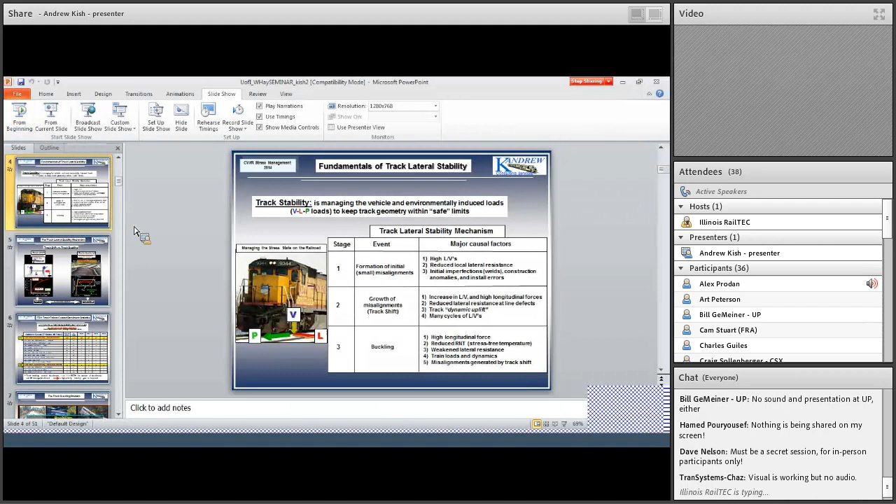Try to get those fixed.

Okay, so again, these are parts of the track lateral mechanism. The three events are: number one, the initial defect generation; number two, the growth of these defects under load; and third, when the defects become unstable in the presence of high compressive forces, we get sudden track buckling. Many parameters are involved, and we'll touch upon these in just a bit.

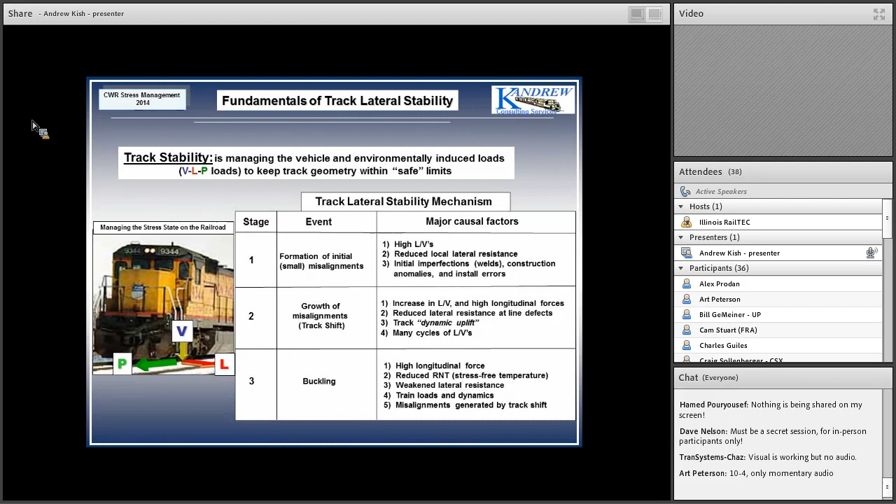But it's important to distinguish between number two and number three, namely between track shift and track buckling. Basically, track shift asks the question of what is the maximum allowable net lateral load into the track structure to keep the geometry limits within safe values.

As we increase the lateral load into the track structure, you get deflections on the multiple load passes, as shown in this figure at the bottom. On the left axis is the cumulative deflection on the lateral load; the bottom axis is the number of axle passes. If you apply higher lateral load, you get larger deflections. With low lateral loads, you may get none. The key thing is to find the one that's safe from the operational perspective.

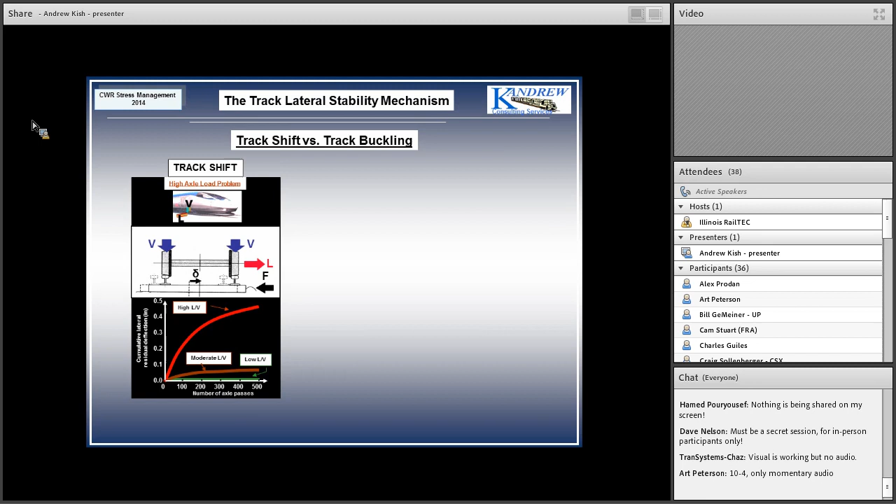So basically, this is a high axle load problem, a load deflection problem, as opposed to the track buckling problem, which asks what is the maximum allowable thermal force into the rail tie structure to prevent the sudden instability you see over here. The issue is to find those parameters that govern this response, and we'll talk about the mechanism a bit later on.

Now, the good thing is that we have models available for these. There's a model called TREDA for track shift, short for track residual deflection analysis. And for buckling, we have a program called CWR Safe. These were developed and tested by the USDOT Volpe Center in the mid-90s, and they're the ones we currently use for analysis purposes.

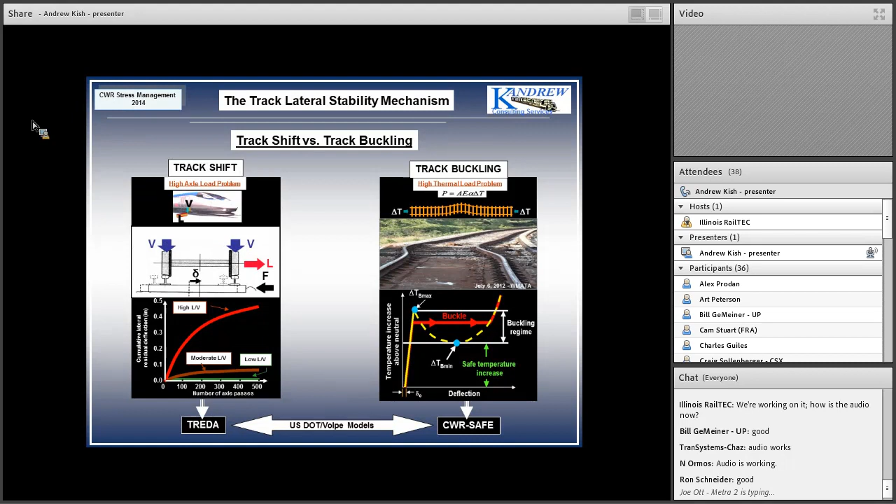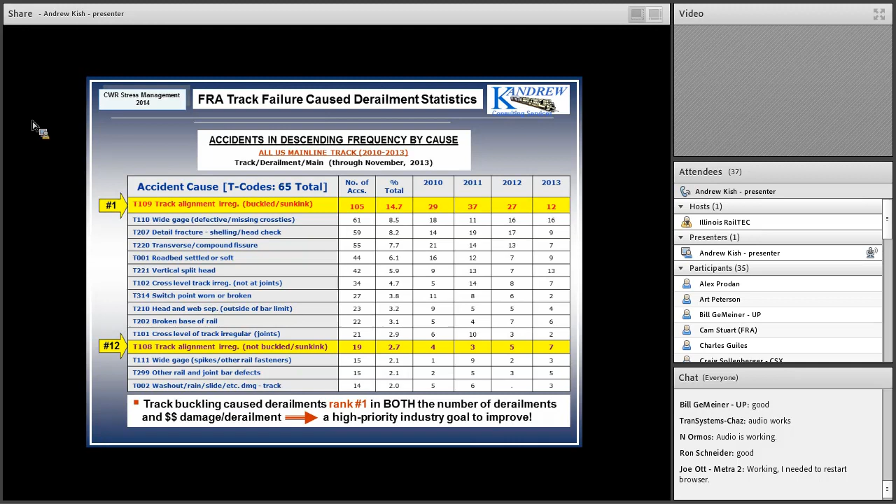Why do we care about this problem? Why is there a big worry on the industry side and FRA side? Well, according to the FRA's accident statistics that track these accidents and derailments, track buckling ranks number one in all track derailments, with 65 cause codes, and track shift ranks number 12. Not only that, but these buckled tracks are very expensive in terms of derailments, and that also ranks number one as far as dollar damage per derailment. These are very serious problems to the industry, and they're concerned about reducing derailments from these modes.

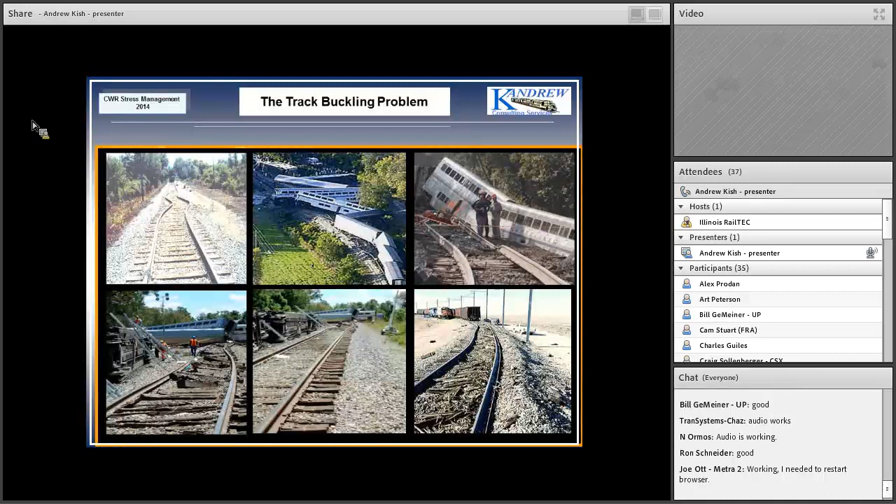If you haven't seen buckled track before, it's nasty - the consequences are serious. The problem is that these incipient buckles are very difficult to detect. They happen suddenly under the moving train, so it's a dynamic event, and of course they can cause derailments. In the US we have many derailments a year. One example, two years ago, we had 27 mainline derailments at a cost of almost $1 million per derailment. This does not include injuries, fatalities, emergency response, evacuations, and so on, so that figure is actually much higher. It's a serious problem.

Railroads also experience many incidents of track buckles or sun kinks which do not result in derailments. That's of course a high cost item from the repair point of view. And this last one - we always think about buckling as a hot weather compressive force problem, but it turns out that winter conditions, when the rails are in tension, causing occasional pull-aparts and rail breaks, also contribute to track buckling, as we'll see in just a bit.

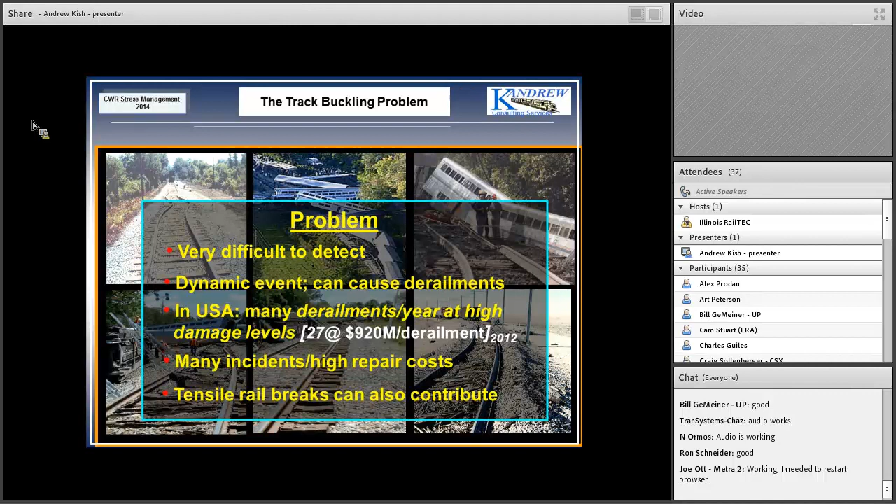So how do we prevent it? The three golden rules for preventing track buckles are: one, keep the thermal forces within safe levels, which really means managing a parameter called neutral temperature, which we'll talk more about later. Two, ensure good track conditions, particularly when it comes to ballast lateral resistance and track alignment defect condition. And lastly, control train dynamics and loads to the extent possible - here we have to think about speed restrictions at certain times. The question is when and where.

Seems easy, right? Not so, because the problem is to determine what these safe levels are and how to manage the neutral temperature in line with those safe levels. Also, what are good track conditions? Well, pretty much they're good or in between, but many times when we maintain a railroad, especially ballast, it gets very weak, and that gives us a lot of concern in terms of offering the resistance required to prevent buckled track. With the last item, the issue is when to impose speed restrictions, at what temperatures, and where - all over the railroad, or just local trouble spots.

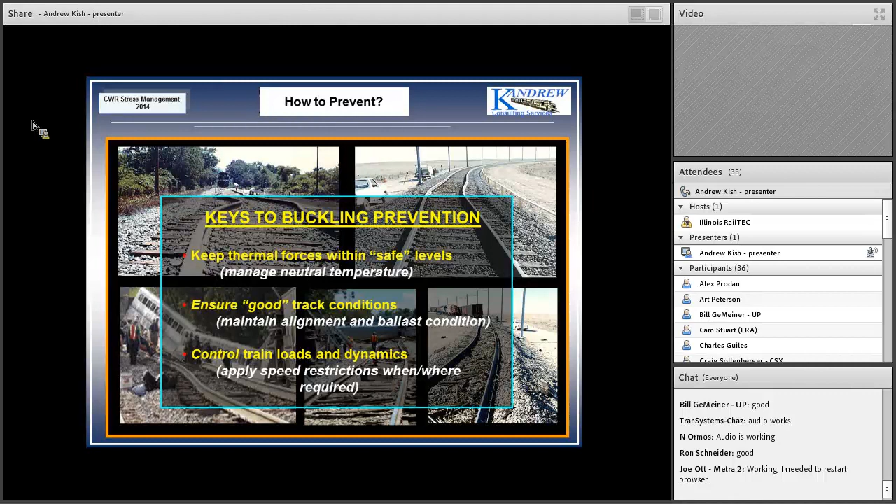Let's get back to the basics. What is track buckling defined as? It's nothing more than the formation of large lateral displacements due to the combination of three events: number one, high compressive forces; weakened track conditions; and vehicle loads.

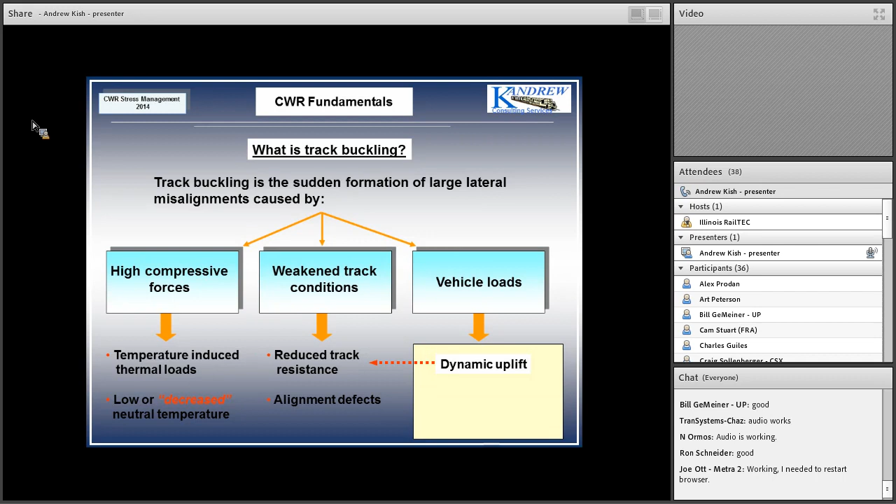Under the first one, the compressive forces are basically temperature-induced loads due to the difference between the rail temperature and the neutral temperature, which we'll talk more about later. Weakened track conditions are basically due to reduced track lateral resistance from the ballast perspective, and of course alignment defects. The vehicle loads themselves don't produce buckles directly - what they do is impact these other two parameters: dynamic uplift causes impacts on track's lateral resistance, high axle loads give us more alignment defects, and braking and traction loads add to the compressive forces and also impact the rail neutral temperature.

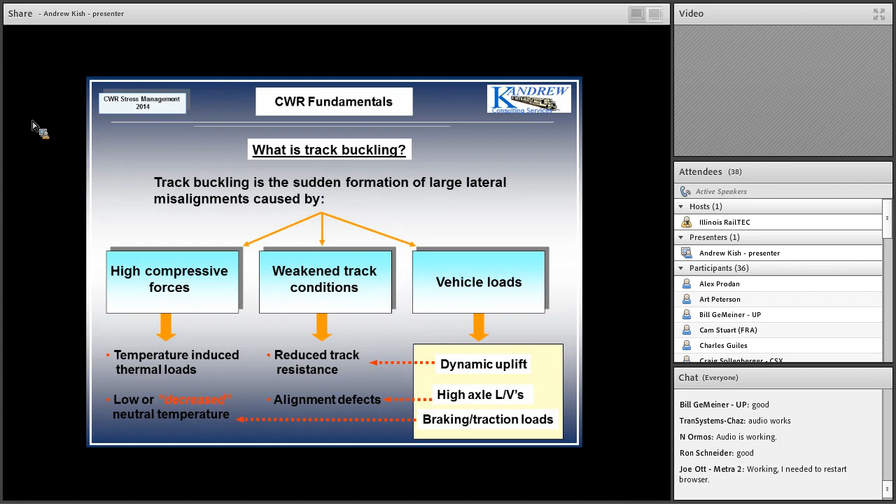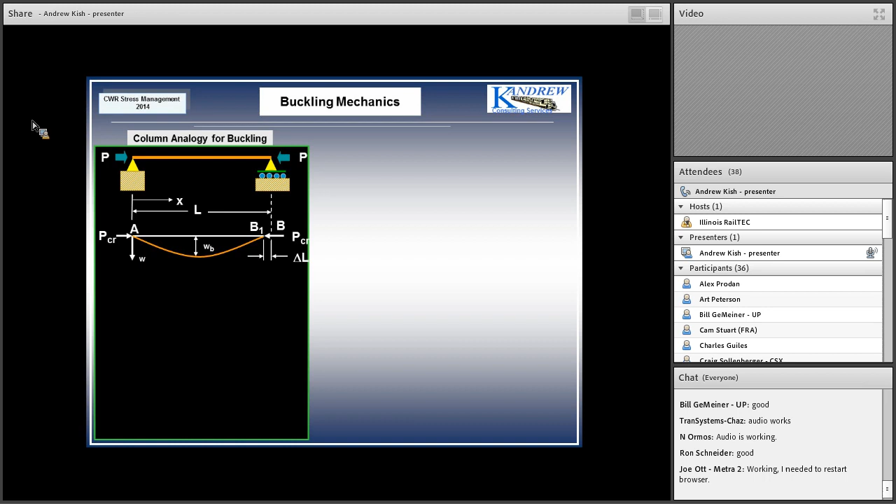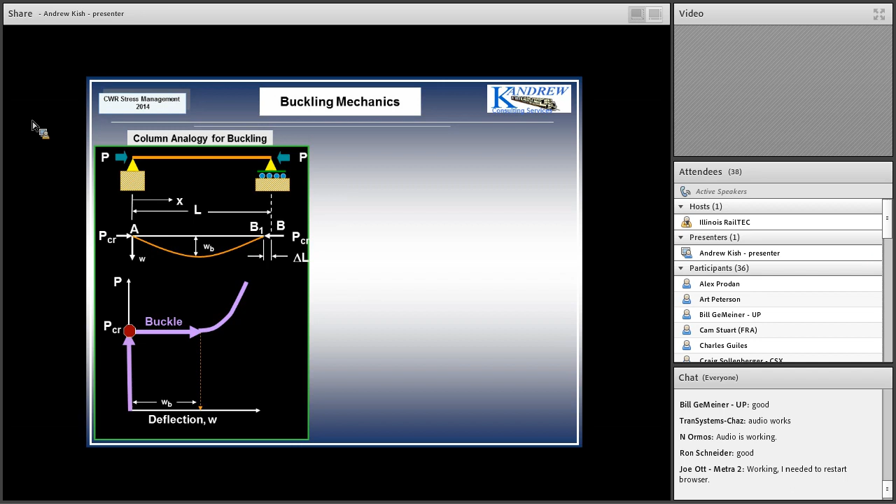So what's the mechanism? It's good to begin a little with Mechanics 101. We all know there's a simple beam under uniaxial compression, load P. That beam stays straight until we reach a certain value of P critical, at which time suddenly it buckles out into the configuration you see there. If you plot the load deflection, P versus W deflection, you get a simple curve where up to some load P critical there's low deflection, but beyond that, once it buckles out, you get deflection obviously. If you increase the load beyond that, you get more and more deflection. Very simple - we all know this problem from basic mechanics.

It's good to think about this in the context of the railroad track, because if you think of the track itself as the beam, it simplifies substantially. The thermal load now becomes the load P, but it's a bit more complex because we have added parameters such as ballast resistance, misalignments, tangent versus curved tracks, and vehicle loads acting into the track system. So it's much more complex, obviously. But the good news is that the temperature load deflection behavior is very similar for our track as well, just like we've seen there.

The bad news is that because of the problem complexity, the many parameters involved, and being a dynamic problem, our current theoretical mechanics does not allow us to determine the exact value where this buckle occurs.

And the good news is that this curve brackets the actual buckling temperature. In other words, the upper value here being T sub B max, the lower value being T sub B min, that kind of brackets or gives the upper and lower bound on where the track should buckle out. So yes, even though we don't know the exact buckling temperature, we'll know at least the upper and lower bound, or the buckling regime when it occurs.

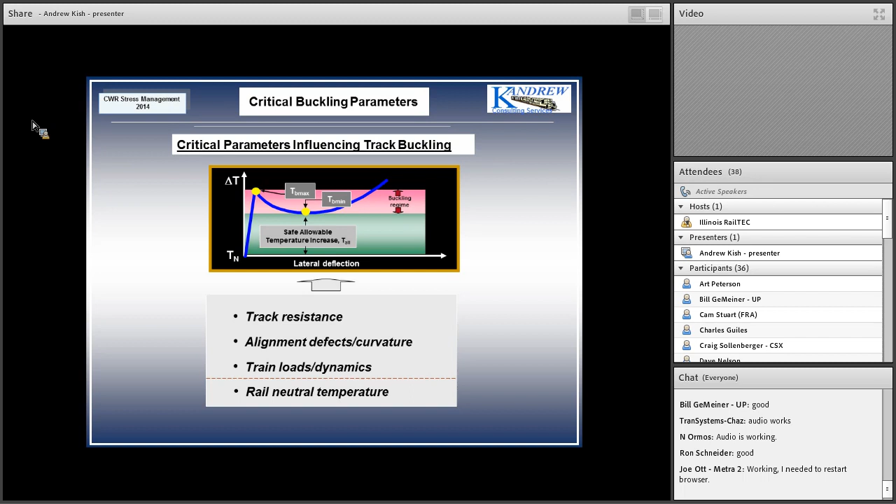Starting with track resistance, also complex. It's got 3 components: lateral, which you typically think of as a lateral spring, longitudinal, and rotational. The lateral is due to ballast. The longitudinal is due to fasteners and the ballast. And the rotational is due to the fastener's rotational capability within the rail tie structure.

Out of these 3, the most important one is in fact the first one, the lateral resistance. And that's basically the reaction offered by the ballast to the rail tie structure against lateral movement.

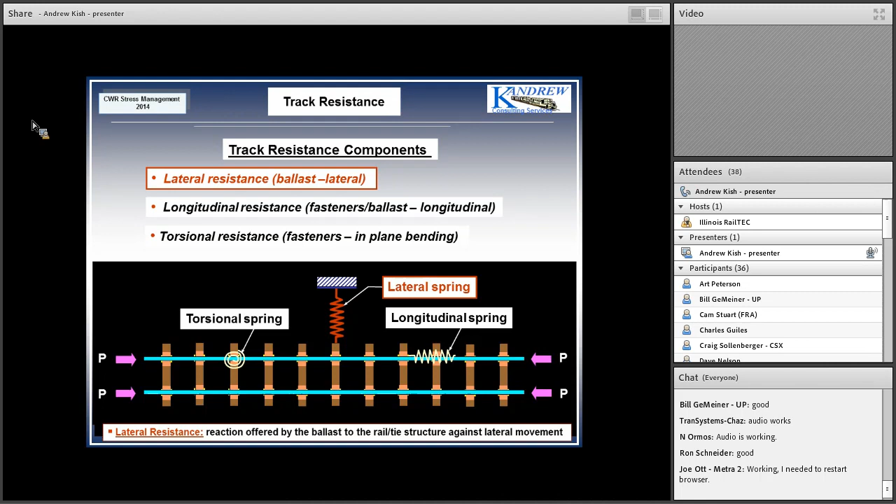How do we measure this thing? Well, in the US we use a technique called the single tie push test. Basically, you have a device that grabs the rail at the base, grabs the tie at the shoulder insert, which you can't see. You apply a lateral load through a hydraulic fixture to the rail into the reaction, and thus push the tie out of the ballast. And you measure its load deflection.

Other measurement techniques in the past involved a discrete cut panel pull test, an entire continuous panel pull test, TLPT. Recently, Plasser developed a technique called the continuous dynamic measurement as part of the dynamic track stabilizer, and we'll talk more about that in just a bit. And we even have an empirical model as part of our CWR-SAFE package.

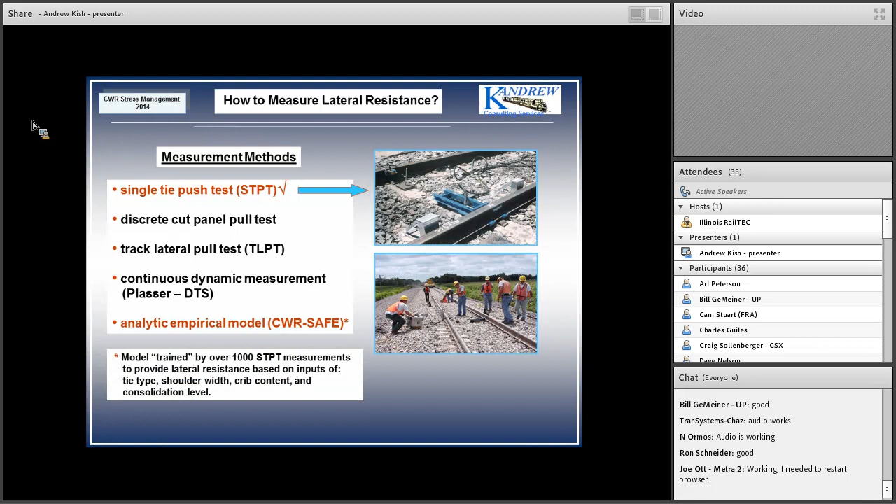Question is, what happens when we push a tie in the ballast? What do we get? Well, we get a fairly complex set of signatures. So you see on your top left there, depending on whether the track ballast is weak, average, or strong. For weak, we get the blue curve. For average, we get the yellow curve. And for strong, we get the orange curve.

Each of these have an elastic initial stiffness, an elastic limit, a peak value, a drooping resistance value, and eventually a limit resistance value. So analytically, it becomes kind of complex.

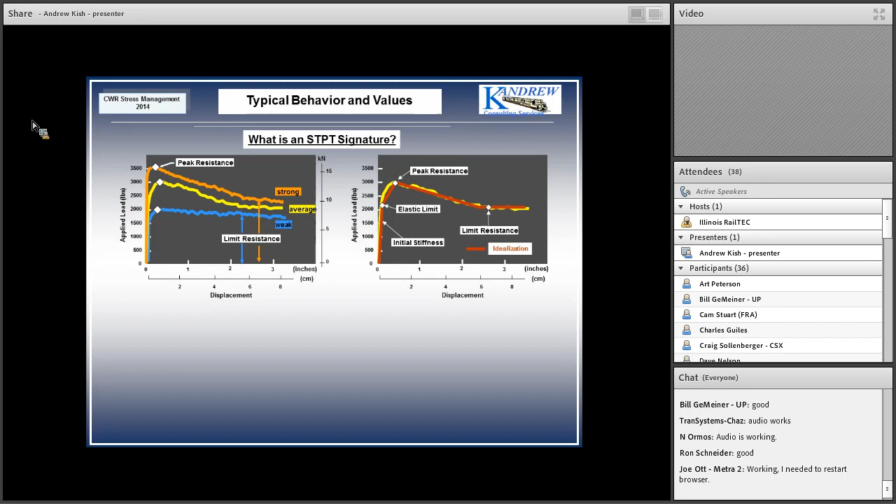We generally characterize ballast resistance in terms of these peak values you see over here. Just to give you a feel for what those are: weak tracks are basically in the blue regime, under 2,000 pounds per tie. Average is the yellow, and orange is strong.

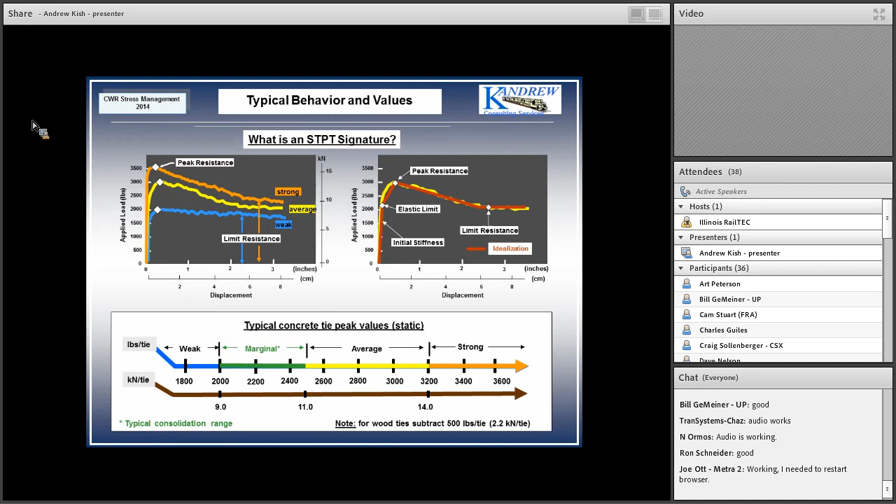Now, as you can imagine, there are many parameters involved in terms of how high these peak values could be. They range from the kind of ties you have, concrete versus wood, the weight, shape, size, the ballast type, the spacing, so on and so forth. Issues with consolidation and maintenance, and even dynamic loads. We won't be able to go into all of these this afternoon. I'm just going to briefly touch upon just a few.

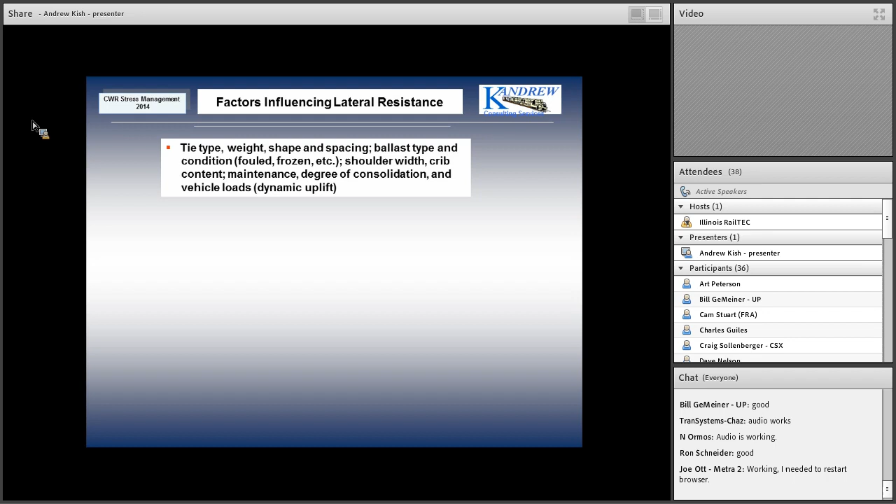First is the impact of vehicle loads, namely this dynamic uplift. What happens to this track structure when you apply a load to it? Well, obviously, under the load, there's an increase in lateral resistance. In between the trucks, where there's a dynamic uplift, negative bending, we have reduced lateral resistance.

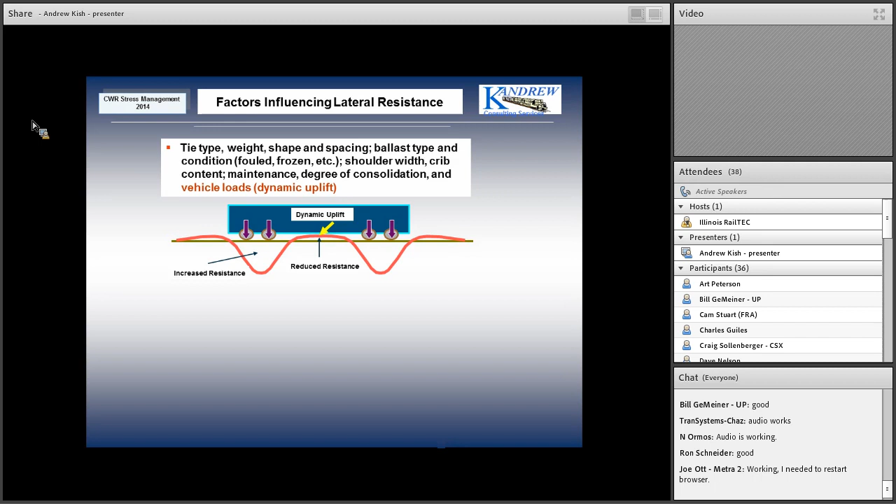How much reduction? Well, again, we have a lot of tests that tell us that the components of lateral resistance on a tie have three parts: one from the shoulders, one from the sides, and one from the bottom. In terms of percentage contribution, the rough rule of thumb after many tests is that the shoulders give us about 25%, the sides give us about 35%, and the bottom around 40%.

So what happens when you have dynamic uplift? Well, what happens is that you free up the tie bottom somewhat, and that means we might lose as much as 40% of the resistance under dynamic conditions. That is in fact why, when tracks buckle out, they buckle out in between the two trucks, as you see over here, as shown by tests. Hence the importance of this dynamic uplift.

Now, you might think, well, the shoulders contribute only 25%, not a big number, right? Why do we care about it? Well, the answer is that once we have dynamic uplift and we lose up to 40% of the resistance, what keeps the track in place? The 25% on the ends and the 35% on the sides.

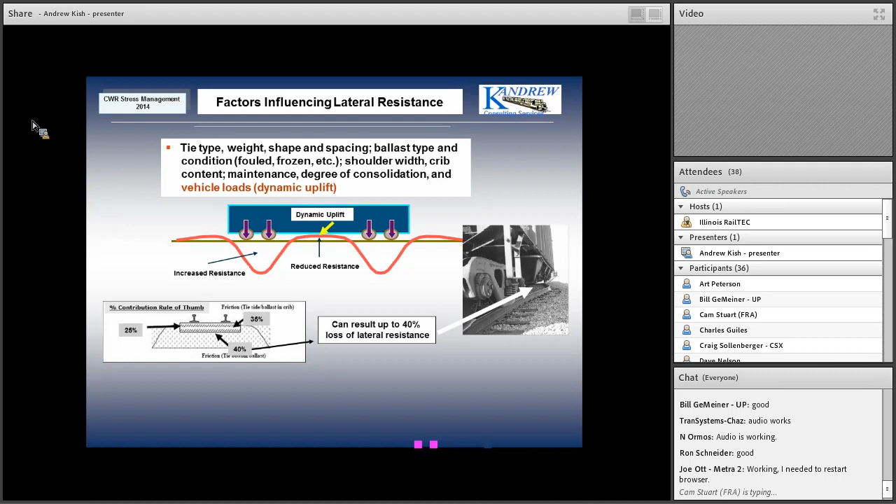What else? Well, in curves, we have an issue again with the fact that curves move back and forth. You've seen pictures of this, I'm sure, in the past, where these curves under thermal load tend to breathe in and out. This lateral motion has a whole bunch of issues with it. Number one, when curves move in and out, the stress changes in the curves, therefore there's an issue with neutral temperature.

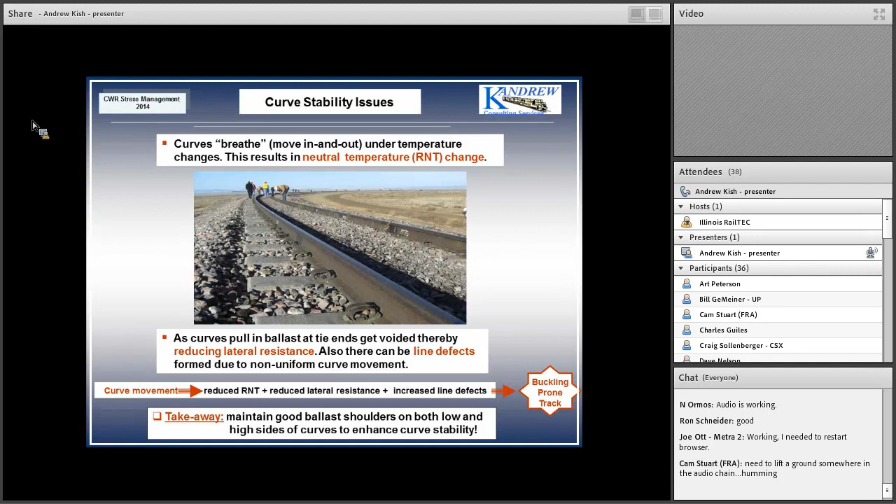With the ballast reduced in the shoulders, we're losing a lot of resistance. And of course, when curves move in and move out, it's not a uniform movement. In other words, the curve will not be perfectly nice and uniform. You think it's going to have some line defects. So when we couple all these elements together, reduced rail neutral temperature, reduced lateral resistance, increased line defects, these are the three main ingredients for buckled track. So the bottom line is we have to be very careful about maintaining ballast shoulder width, even though it's only 25%, especially in curves, it's a big impact on lateral stability.

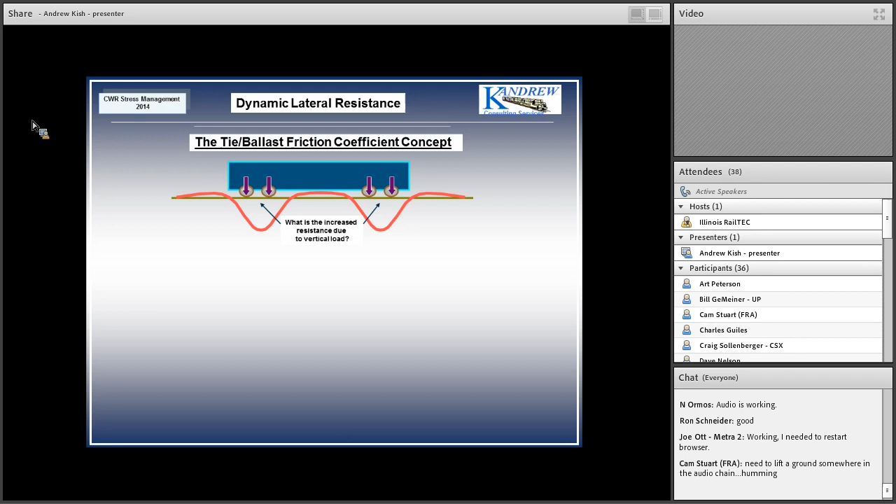What about under the load in terms of increased resistance? Well, we know that vertical loads obviously add a lot to lateral resistance, and this brings into focus a parameter called the tie ballast friction coefficient. That is a coefficient that relates the vertical load to lateral resistance. Namely, if I apply vertical load to the tie and attempt to push it out laterally, the resistance is going to be the sum of the static condition and the dynamic condition, being the loaded condition. That means we have to add a parameter called this friction parameter times the vertical load to the tie. How do you get this mu factor?

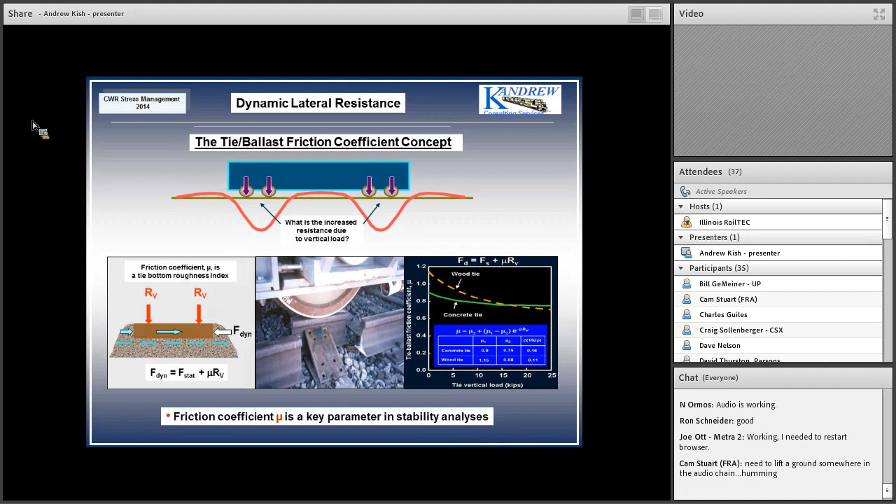You've got to do tests. You've got to apply different levels of vertical load to the tie and push it out in the ballast laterally and measure its loaded resistance. So from the difference of the loaded and unloaded, we can figure out what this friction parameter is. Bad news is that it's a complex parameter. It's nonlinear with load. It changes with tie type, whether it's wood or concrete. This is one area that's very important for us because this parameter has a big impact on both the track buckling part of the problem, as well as later on the track shift part of the problem.

All right, that's it for lateral resistance. I want to just briefly touch upon one more parameter, which is the maintenance and consolidation influence on lateral strength.

We know that when we work ballast, we do surfacing, lining, tamping, undercutting, ballast is disturbed so that the track lateral resistance decreases substantially. How much? By as much as 40 to 60% in some cases. It requires us to get that

back to regenerate the condition to better values. Now we have two ways of doing that. One is what is called dynamic track stabilization, or DTS, or by traffic tonnage.

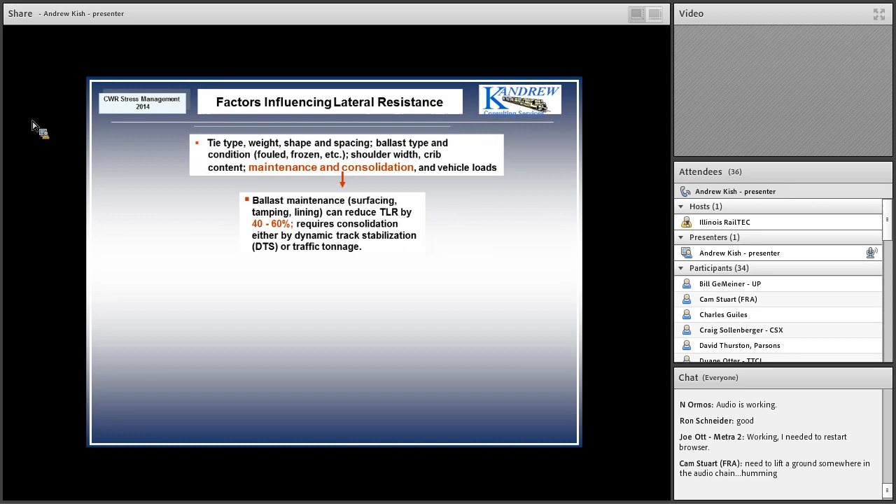Some of you are not familiar with the DTS, or dynamic track stabilizer. Basically a machine developed by Plasser back in the early 80s. It's a machine that applies a vertical load to the track structure, coupled with a horizontal vibration of a certain frequency, 30 hertz, and you move this along the track at slow speeds, up to 1 mile per hour. What this does is, the combined effect is you reconsolidate the ballast particles and also increase this friction coefficient at the tie bottom, resulting in an immediate 30 to 60% recovery of lateral resistance. It's a really good thing to do.

What about tonnage? Well, that's a bit more difficult for us because we know that many applications of vertical load will eventually give us some stabilization. But unfortunately, to date, the mechanics and the rate are not well understood.

How much tonnage do we need to get the track back to a safe value? Well, based upon some early European tests, the assumption was that you need at least 100,000 tons, or 0.1 million gross tons of traffic, to at least achieve the same as the dynamic track stabilizer.

That's a lot of tonnage. It takes some railroads 2, 3, 4 days to get that at slow speeds. It's a very, very bad thing to have in terms of putting on this traffic and consolidating at a slow rate. The point is that today's research has not really quantified whether the quantity is really 0.1 or much more.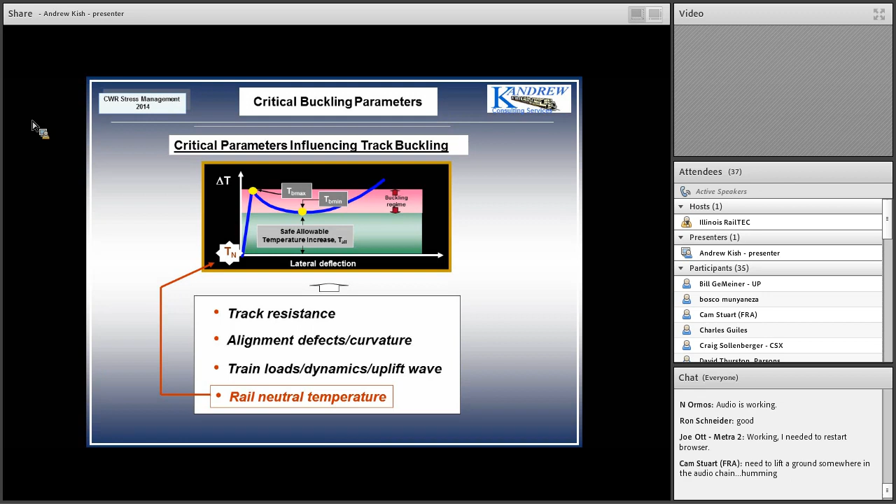What is it all about? Well, we know that stresses are made up by many components to give us the load P: thermal, mechanical, and residual. If we integrate the stress over the area, making some assumptions, we get a simple equation that relates force to temperature: P equals E alpha times the temperature difference in the rail, TR minus Tn. TR is the rail temperature, and Tn is its magic neutral temperature.

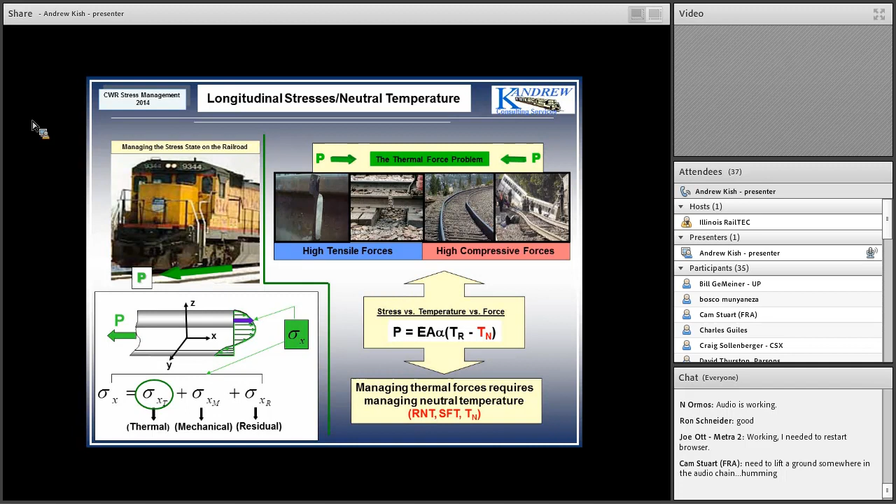And of course, when these forces are high in compression, you get potential for track buckling. When they get high in tension, you get potential for rail breaks and pull-aparts. So managing thermal forces really comes down to managing this parameter called neutral temperature, which you see in literature sometimes as T sub n, sometimes as RNT, sometimes as SFT. SFT is short for stress-free temperature.

And that's the definition. Neutral temperature is defined through this equation. It says that neutral temperature, Tn, is that temperature at which there's no force in the rail. You set P equals 0 in this equation, and you get that the rail temperature equals neutral temperature, which is the definition.

E, A and alpha are just engineering constants. E is the rail's modulus of elasticity, A is the cross-section area, and alpha is the coefficient of thermal expansion. If you multiply those three together for a 136 pound rail, you get a number like 2600. That says that for a 1 degree change in temperature, I get a change in force by 2600 pounds.

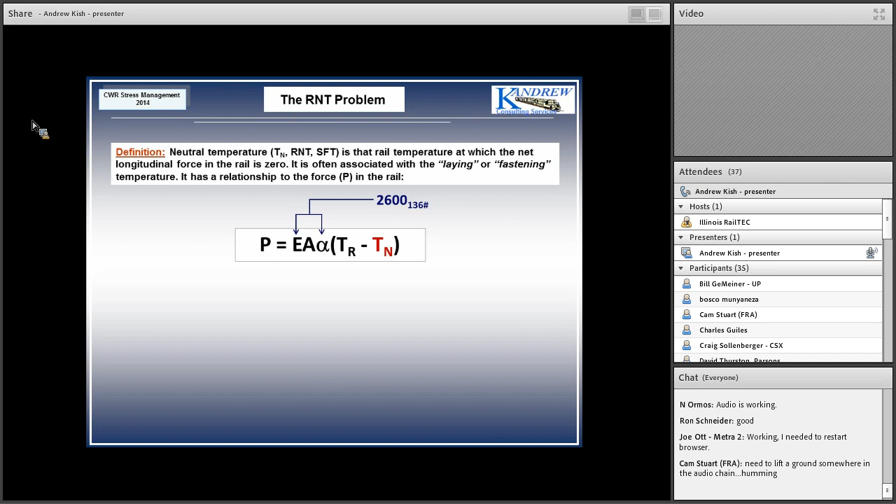Now you can easily put some numbers in this equation. Let's take a nice high neutral temperature of 90 degrees, that's a good value, and a hot summer rail temperature of 130. Now these are rail temperatures, not ambient, okay? This equation gives us roughly about 100,000 pounds per rail. Big number, but not big enough to cause any sort of buckling worries.

However, if now this neutral temperature is no longer 90, but say it drops down to 50, then the equations give us, keeping the same rail temperatures as before, the force in the rail doubles, and this force level of over 200,000 pounds per rail is big enough to buckle the track out.

So you might ask the question, well, that's nice, but does neutral temperature migrate so much up and down? And if so, why? Well, the answer is, unfortunately for us, yes it does. It changes a lot because, first of all, the rail is not constrained in the rail tie structure completely. It can contract or expand longitudinally, move laterally in curves, and can even move vertically in track settlement. So rail kinematics impacts neutral temperature.

Also, when the rail breaks, or is cut for defect removals, what happens to the force? Force goes to 0 at the break. The neutral temperature becomes the rail break temperature, so rail breaks also cause a large reduction in neutral temperature.

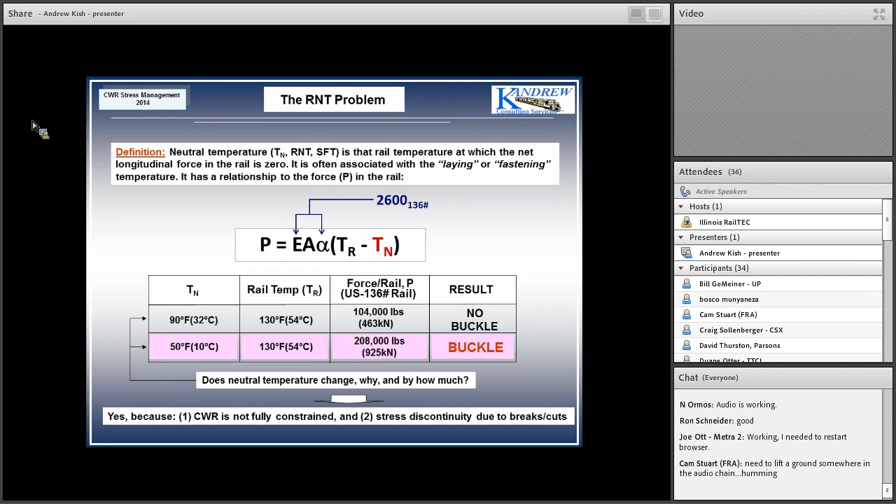Just to give you a feel for what's really happening out in track, this is a kind of nasty looking curve summarizing 5 years of testing on a major US railroad, neutral temperature. The vertical axis is the neutral temperature, the bottom is time, compressing 5 years of data in here. The green data is the high rail, the red data is the low rail. It's a 2-degree curve, concrete track, where the measurements are made by a device called the rail stress module.

It's done by a company called Salient Systems. It's a rail attach unit, based upon a strain gauge concept. It measures neutral temperature, rail temperature, and rail stress in a continuous fashion. And that's what you see over here plotted with time.

You might note the fact that typical installation regimes in the US are roughly between 100 and 110 degrees Fahrenheit. And you can see how much out of this range the RNT is. Kind of out of spec.

Point your attention to these little valleys over here. Those are results of rail breaks. So the rail breaks, cut for defect removal, the neutral temperature changes substantially.

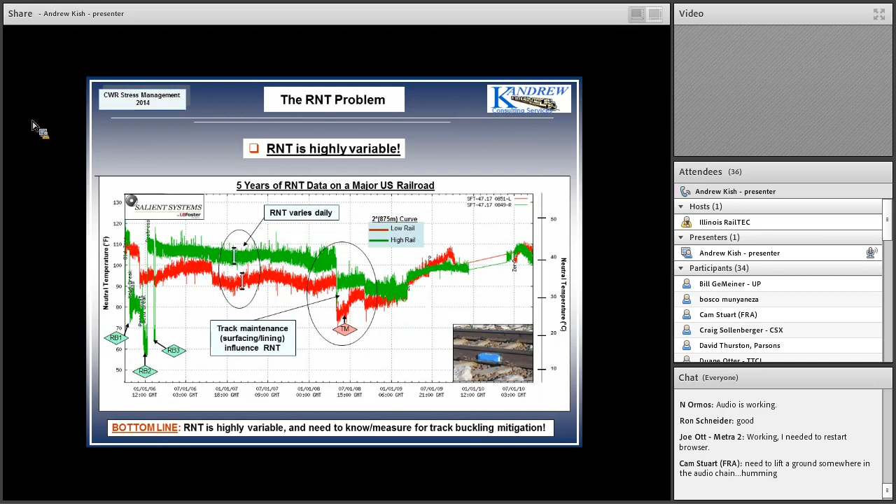So basically, the idea is that RNT is in fact highly variable, and its knowledge is very important for track buckling prevention and mitigation.

I want to go back to this rail break scenario quickly, just to give you a feel for what's really happening there. Unfortunately for us in the U.S. here, we have many rail breaks, about 80,000 per year.

According to the FRA's accident statistics, we have about 100,000 internal rail defects requiring removal from service. Okay? And as you've seen before, when the rail breaks, its neutral temperature goes down. And the problem is now when to make this repair, when to come back and adjust. If I don't make this adjustment before the advent of warmer temperatures, the track will become buckling prone. When I do come back and readjust, how to adjust a condition where I don't know what the neutral temperature is. The railroads don't have these measurement schemes in place, so they have to guess at the depressed neutral temperature condition to adjust.

So basically the problem is that in any given year we have over 180,000 locations on the railroad that might be potentially buckling prone.

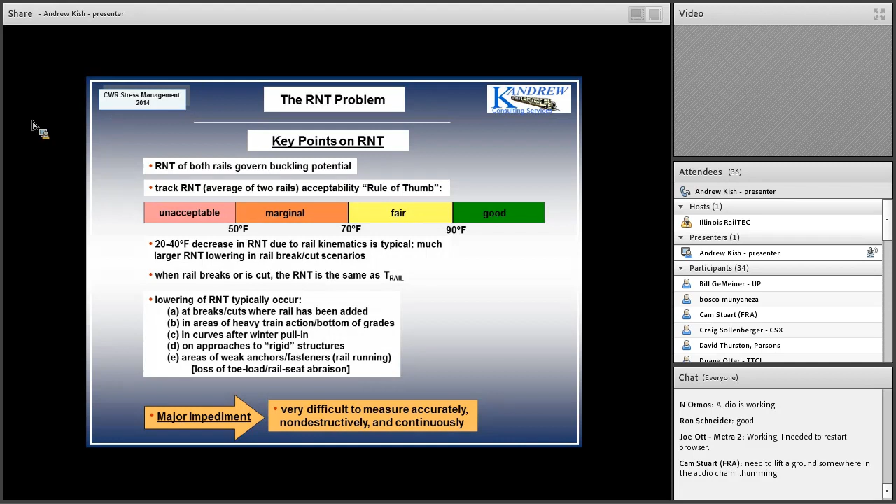And that's because over the years we tried many, many techniques, ranging from strain gauges to rail uplift concepts to ultrasonics, acoustics, magnetics, and so on. All these are good techniques from a physics perspective, but when it comes to practical implementation, they all have issues with accuracy and with not giving us continuous data. Some are destructive, some are not, and they're not too cost effective. So this becomes one of the major needs in terms of R&D.

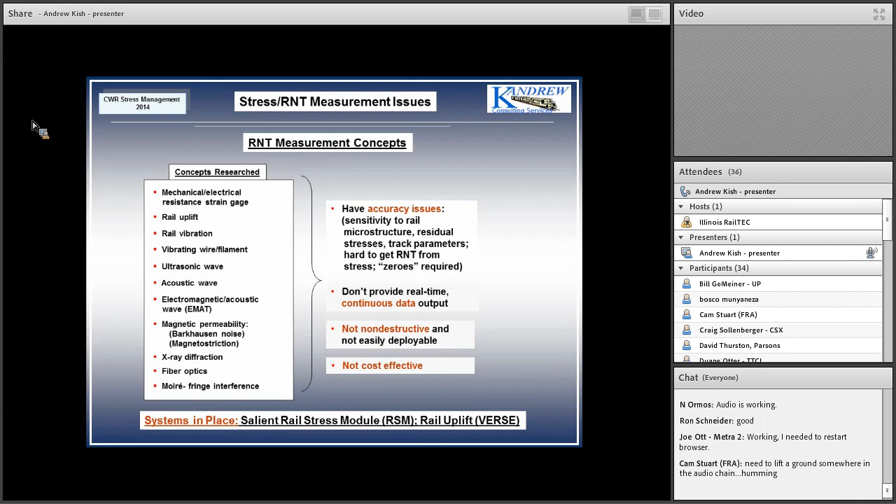I'll come back to this a bit later on. There are two systems in place today in the US that are being used mostly for test purposes.

One I mentioned before is the Salient RSM package. It's a rail-based package with electronics measuring rail stress, neutral temperature, and rail temperature. They already have a situation where they access stored data through a wayside reader, and that sends the data to a database management system accessible from the internet. They also can detect buckles by monitoring these conditions and issue a hazard warning, and they can detect rail breaks.

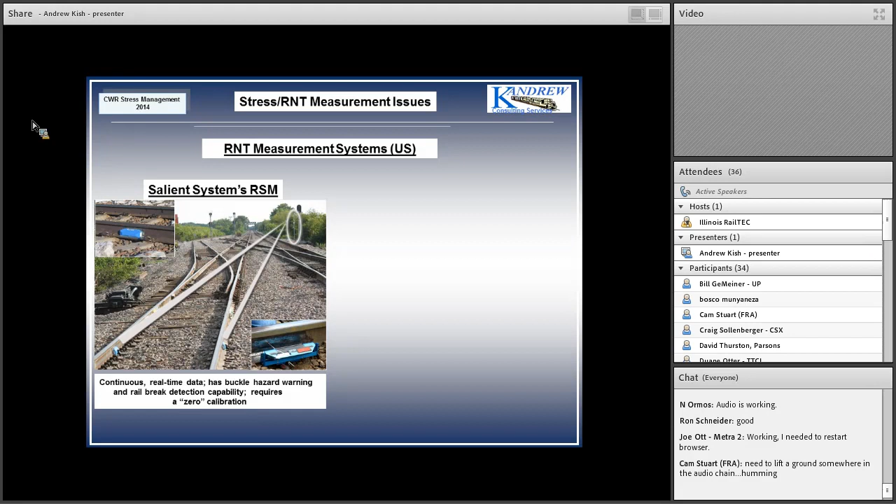The other one is the rail uplift, a concept based upon lifting the rail up with a known force, measuring its deflection, and applying that to a beam bending equation to back-compute what the force in the rail is. This is the frame-type structure that does it. The problem is that it only works when the rails are in tension, and that's an issue because we don't know when the rails are in tension. Sometimes you're going to make this measurement at nighttime.

It doesn't work in curved tracks. Curved rail uplift is very complex analytically. And of course, you have to unfasten a section of rail—in this case, 50 feet either side of the measurement point—so it becomes somewhat destructive as well.

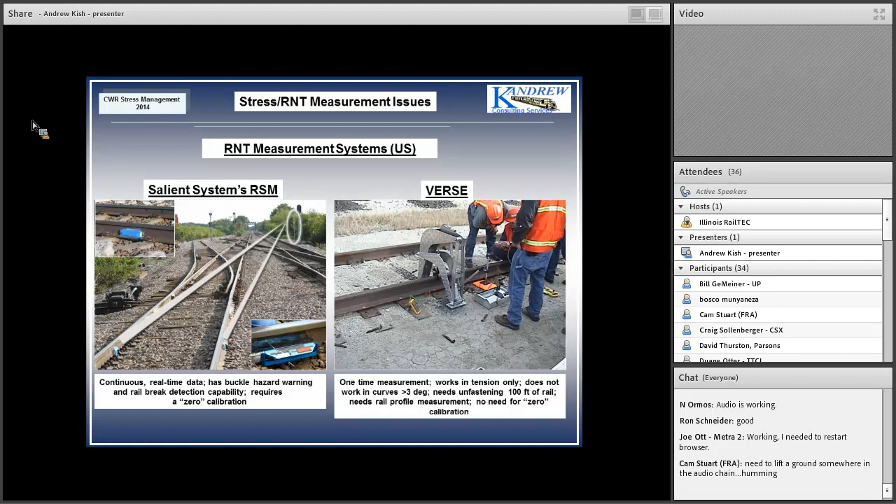The good thing about the system is that it does not need any initial calibration. You need to know the rail cross-section area, so if you get worn rail, you can make some profile measurements because that goes into the analysis. So these are the two current systems in place.

Getting back to our stability issues in terms of safety criteria, it's very simple: we have to make sure that the loads in the track are less than the buckling loads. Now for a track, the longitudinal loads are the thermal loads—the difference between the rail temperature, T, minus Tn—and these must be less than the buckling loads. Buckling loads are, in fact, given by a stability criteria, the minimum point on this curve.

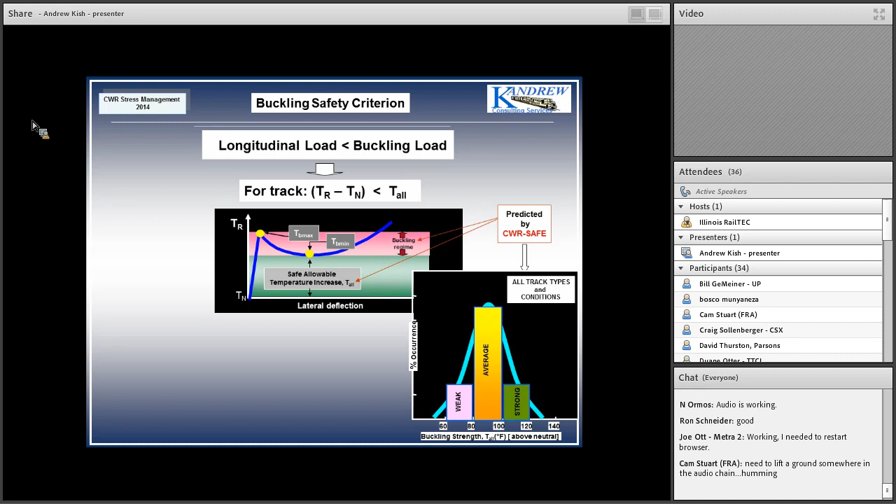Now, the good news is that on that part we're okay. Over the years we have done a whole bunch of model studies, about 1,000 computations on different track conditions and parameters, so we have a pretty good understanding of what these buckling loads are. The bad news is that we don't know the other part of the problem too well, namely what the neutral temperatures are, from which we compute these values. Again, these are highly variable due to kinematics, rail breaks, and defect cuts, and also very difficult to measure.

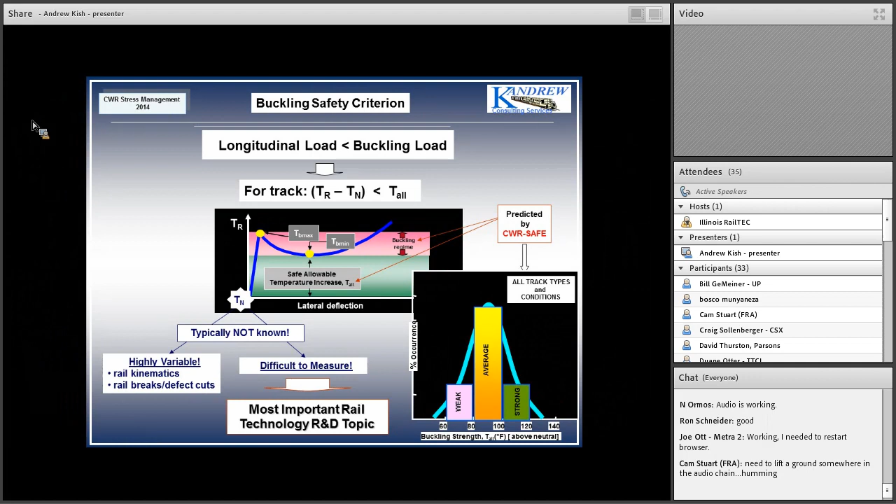This is, in fact, the most important problem in rail technology: to determine and evaluate RNT continuously and accurately.

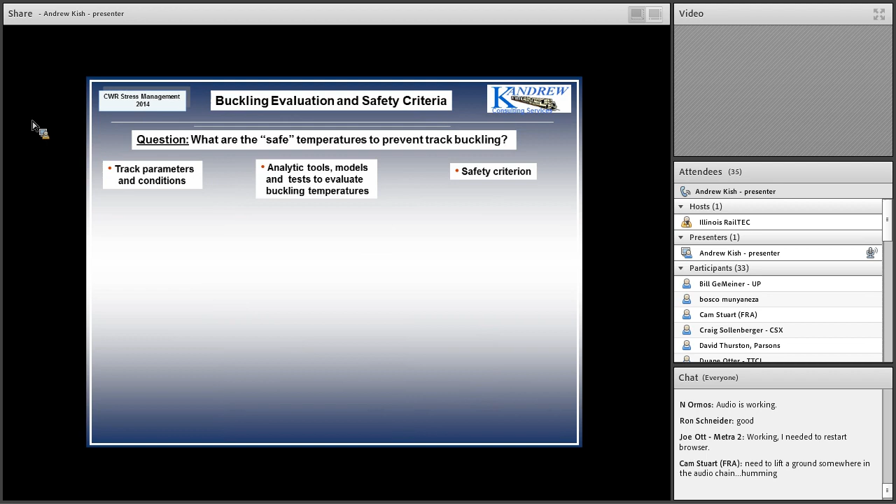So how do we get these safe temperatures to prevent buckling? We need three things: track parameters, a model, and a safety criterion. On the parameters, there are a whole bunch of them, ranging from rail type and size, curvature, line defects, lateral resistance—we touched upon some of these earlier. That goes into the model, and the model gives us this stability curve, the stability diagram.

Our safety criteria is basically this minimum point on the curve. As I said before, below this, buckling cannot occur or shouldn't occur; above which it does occur. And that's our buckling safety criteria.

The European standards are similar to ours, but they have two levels of safety. Level 1 is just like ours—they believe that the minimum point on this curve gives them the safety they desire. But they also have a less conservative value where they're actually allowed to go into the buckling regime by a small amount, to give them a bit more help in managing their track condition. How much do they go up? About a quarter of the amount of the buckling regime.

So, just a few things on the theory aspect—I know you might not be interested in this, but here it is. The model is basically a nonlinear classic beam theory, using variational principles.

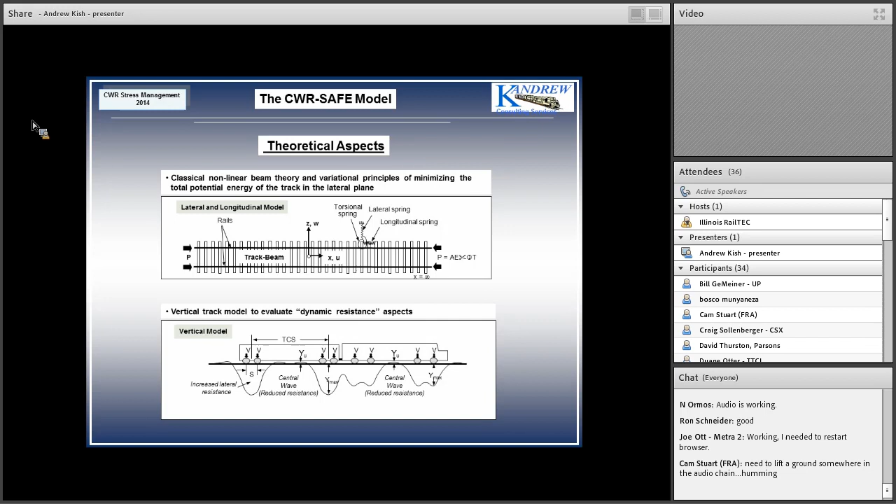We've got the resistance values, the torsional, lateral, longitudinal as nonlinear parameters in there. This is the lateral plane. You have to couple this to a vertical problem, namely determine the dynamic uplift, and hence the reduction or increase of lateral resistance, which brings in the issues of track parameters and loads. You've got to worry about both tangent and curve analysis.

And curve analysis is rather complex, as you can imagine here. And we've got to worry about boundary conditions, namely what sort of buckling motion shapes do you expect to get.

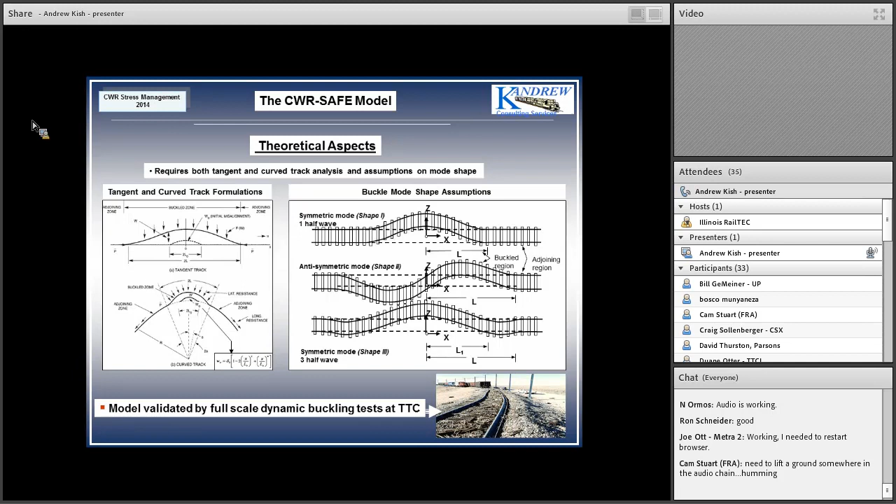And of course, all models have to be validated. We've done a whole bunch of full-scale dynamic buckling tests. Here you see the last one done in 1987, where we actually derailed a train to prove the concept. So we're pretty comfortable about the model being good enough for determining the safe temperature increase values.

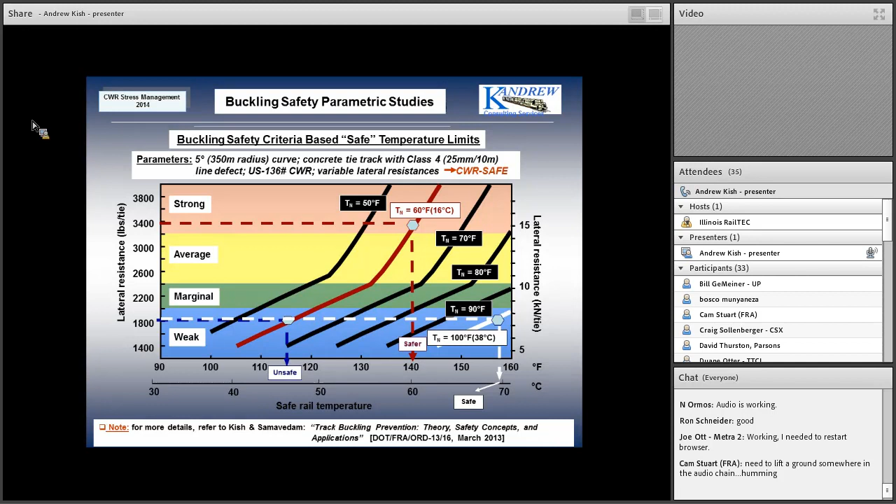If you're interested in a lot of details on this, in terms of a lot of parametrics, we only show you one case. Of course, we have to do this for tangents, 3 degrees, 7 degrees. You can look at different line defect conditions and so on and so forth. At least now we have a good methodology in place, understanding of what these numbers are. All those are available in this report you see down here. I think you have that available now, so feel free to look in there and get a better handle on how these parameters come together.

Quickly, on the track shift side, this is the problem that I mentioned earlier, where we have the issue of multiple load passes with high L-over-V ratios. It's a moving load problem. Here the parameters are, again, moving axle loads, both static and dynamic lateral resistance, thermal loads, curvature influences, alignment defects, and a lot of work done in the past where it was attempted to look at the problem from a static point of view. And that's why the moving loads are very important.

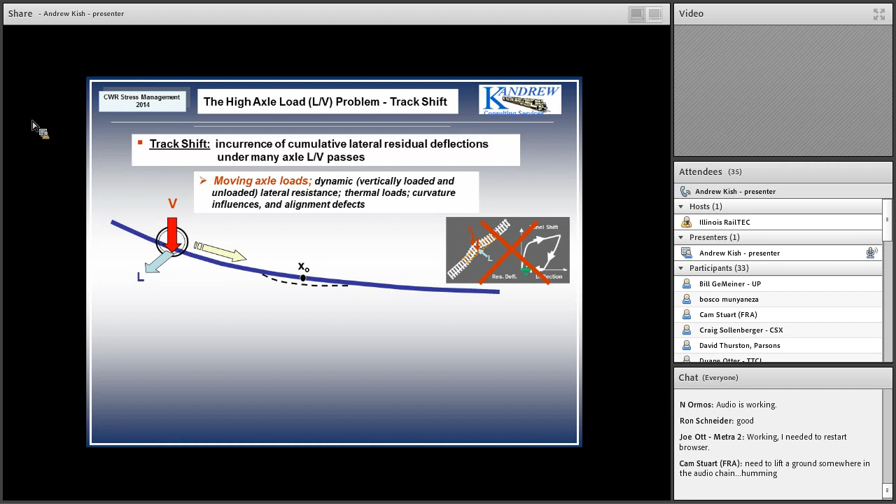The idea was to put on a set of vertical lateral loads at one point in the track at X0, push the panel out and measure the load deflection response that you see over here, and find out which combination of L-over-Vs give us a residual deflection. So it turns out this is not the way to go, because it highly underestimates the real problem, which is moving closer and closer and closer to this X0, each incurring possible lateral deflections.

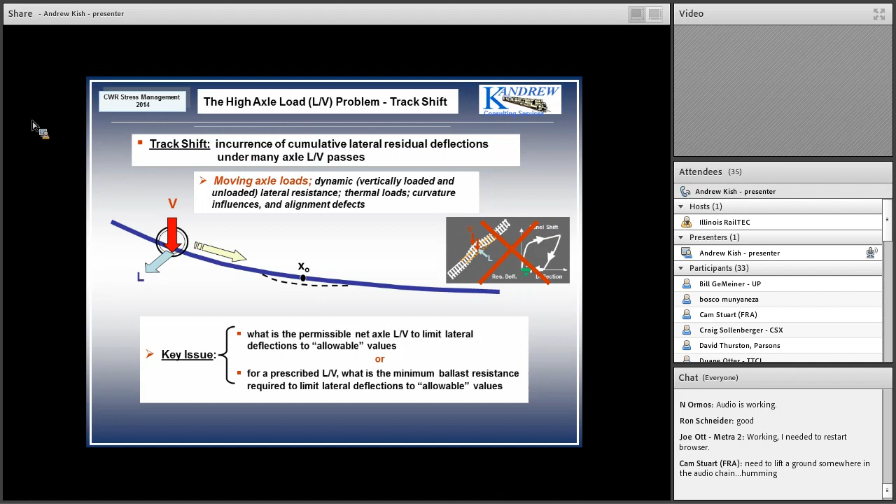As I said before, here the issue is basically, or the question was, what is the permissible net axle L-over-V to limit lateral deformations to safe, allowable values? Or conversely, you can ask the question another way, saying, given a particular L-over-V, what is my limiting ballast resistance so that I still retain good track geometry in the lateral direction?

Getting back to the lateral resistance in this case, here we're going to worry about the earlier initial part of the curve, namely the elastic limit and beyond that. And here the problem is, again, we have to look at both loaded and unloaded resistance, bringing in the friction coefficient parameter.

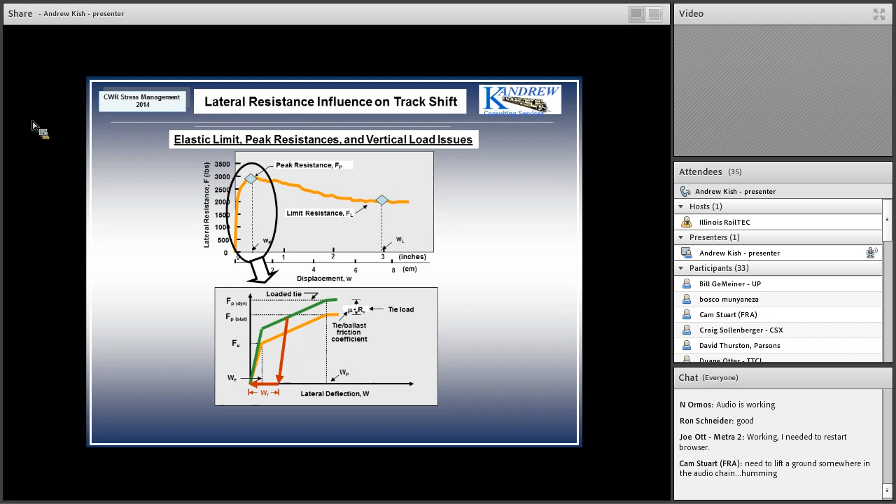Here the problem is that we have to be able to add up all these load cycles, loading, unloading, loading, unloading, as the load approaches a particular point of interest. This hysteresis loop becomes very important in this whole mechanism, and that's the whole crux of adding up these incremental values of deflection to see what happens on the multiple load passes. The idea is, as I keep moving a load closer to the point, I have to calculate the deflection on the one load pass, and then at the end, sum up these residuals so you get a final value per load pass.

This is the whole crux of the entire analysis, where you compute this for many different combinations of lateral to vertical load ratios and find a value that you feel comfortable with in terms of a safety limit. You know that some values create large deflections - that's not a good thing. Some create zero or small deflections. So we have to figure out what is a good safety limit.

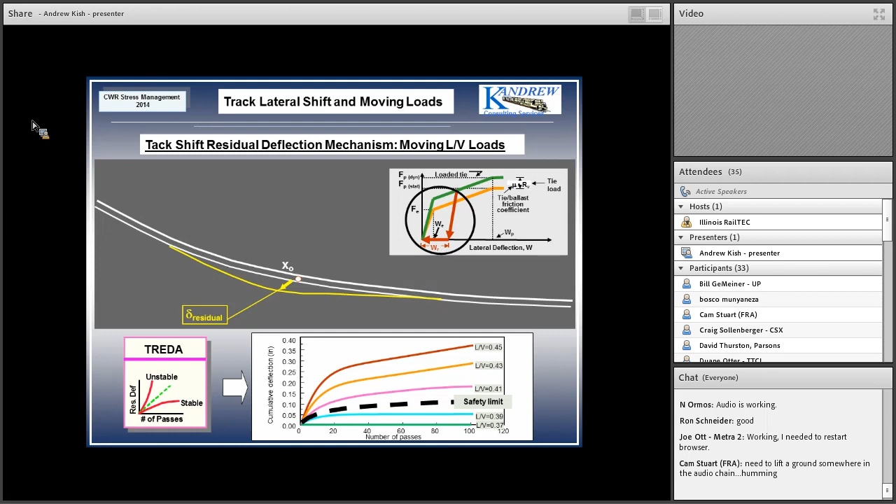The criteria is that lateral loads generated by, in this case, high-speed vehicles operating under maximum speed, cant deficiency, thermal load, and initial line defect conditions should not produce any permanent set larger than some value, x. The challenge for us, the question is, what is x?

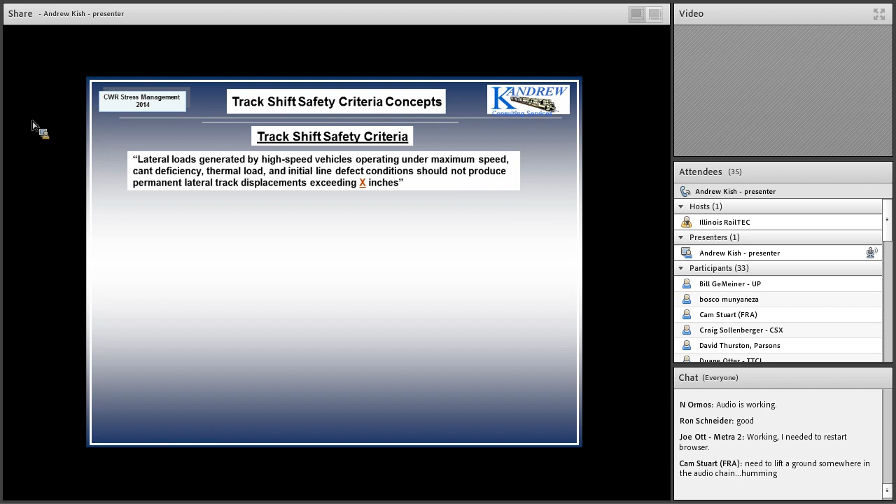Well, again, there are two levels of safety. Level one says that I'm going to have x be 0 - find the L over V that produces 0 permanent set. It's the elastic limit criteria.

Or level 2 says, well, no, that's too conservative for me. Let me allow some finite degree of deflection, such as maybe 0.1 inches, and this is a level 2 criteria. The U.S. just enacted a safety limit, part of the passenger equipment safety standards just last year, where they adopted the level 2 concept, and it came up with the limit, as you see over here, that the lateral loads shall not exceed 0.4 times the vertical plus 5,000 pounds.

Our friends in Europe, with their high-speed rail network, believe in this model, this level of safety. If you compare the two in terms of lateral loads allowed, our limit in the U.S. is the orange curve, and the European limit is this yellow-green curve. You can see that their allowable is much less than ours, therefore they're much more conservative than we are. I'll leave it up to you to decide whether you prefer our criteria or theirs.

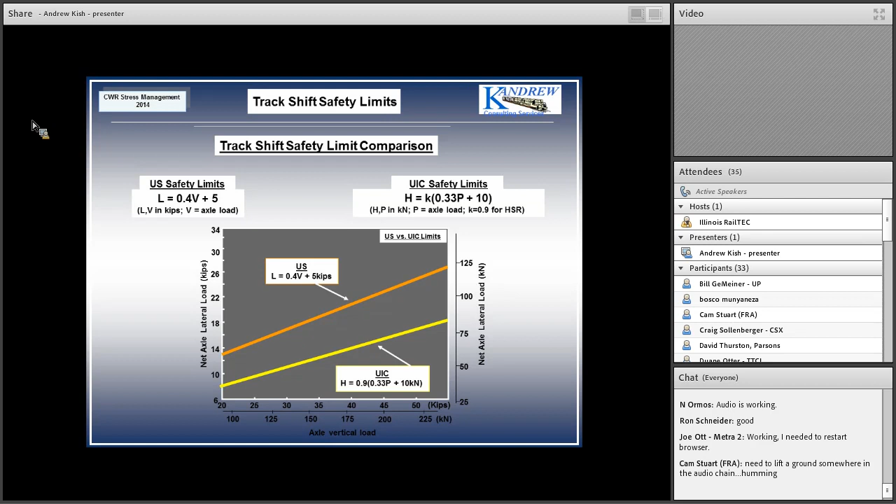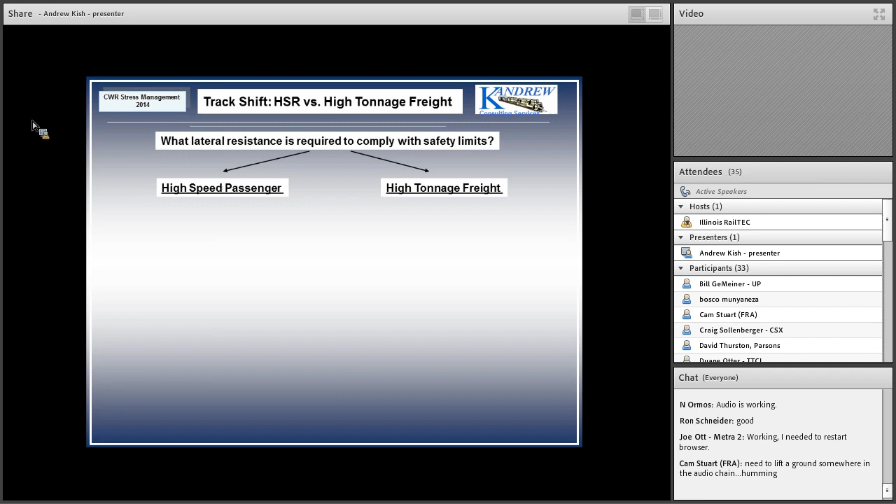Getting back to the issue of lateral resistance, and because that's the main component here, what's required to maintain the safety limits for high-speed passenger service? We have limits in the U.S. as well as in Europe. We have the criteria, that's very good. But how do they check against it? What lateral resistance is required to maintain those lateral loads?

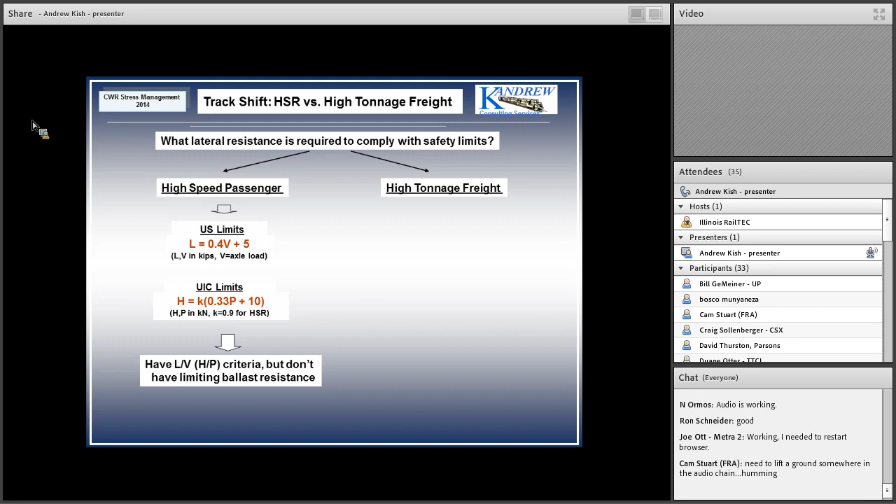For us here, in terms of high tonnage freight, we get a real serious problem nowadays, and that is that we're running very long trains, as much as 140 cars a train, with distributed power. It means you get power in the front, power in the middle, power at the ends, and these tend to add a lot of push-pull force into the rails and tracks and the vehicles themselves, and they create a condition where we get forces acting outward on a curve in some cases, and inward in other cases, based upon the draft or push force conditions applied by the distributed power.

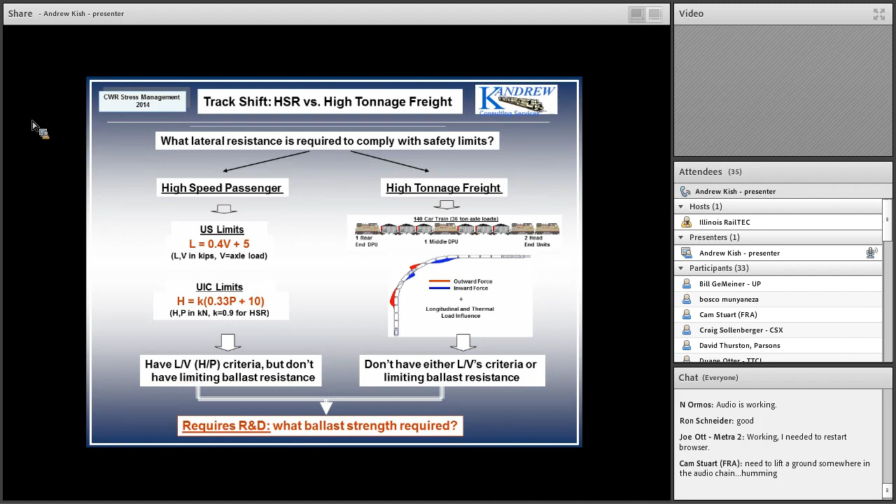And here we don't have limits on lateral loads yet, nor do we have limits in terms of ballast resistance. That's a hot topic nowadays because a lot of areas are trying to run these long trains, and curve movement becomes a big issue. So, again, what's the minimum ballast or lateral strength required for these conditions? Again, requires more R&D.

So the question comes up with all these issues being said: have we reached the limit of lateral ballast strength capacity? Do we have enough ballast?

Well, for these special cases where we're running long trains such as high-speed trains, but especially with freight tracks, the answer is yes, we have a concern with reaching the limit of ballast resistance because we know we get buckle track, especially when the RNT is low. You can have high resistance but still get buckled tracks.

With high lateral loads, as I said before, we have these dynamic loads on the track structure, and here again we may have reached the capacity of the ballast because we get a lot of motion in the track, especially in curves. How do we improve?

Well, first off, getting back to our usual need in this area, basically we have to measure neutral temperature. If you can't do that, we have to help the industry implement best practice guidelines to track and monitor those conditions better, or work on the conditions that contribute to neutral temperature.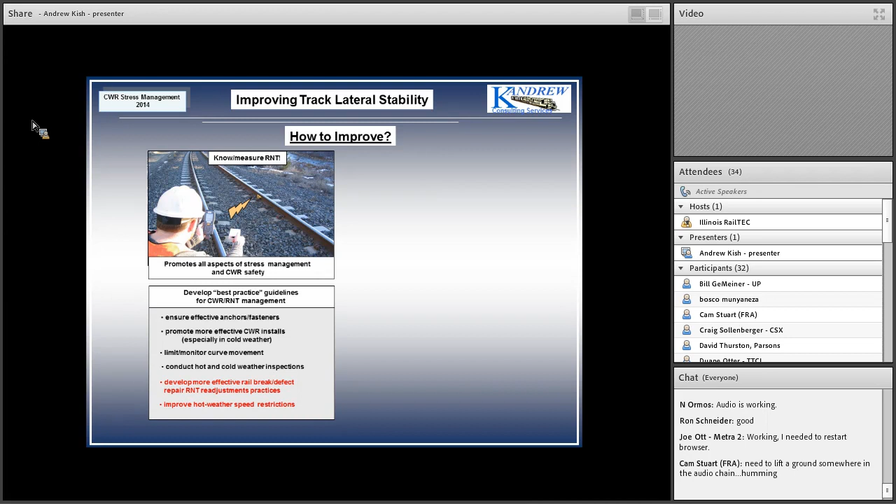We're talking about ballast a lot in terms of maintenance. We need to promote improved maintenance practices, especially in the regime of consolidation after ballast work. As mentioned before, the dynamic track stabilizer is a great technique to do this fairly quickly and efficiently.

And what if we can't do all that? What's our last resort? Well, we have to consider alternative track designs aimed at high lateral strength tracks.

Here's an example. See this unusual concrete tie that looks like a dog bone. It's got these wide ends, and these have a lateral resistance about two to three times that of the conventional concrete tie.

These are being tested right now. They're produced by a company in Linz, Austria. It's called the HDS tie. They're being tested right now at Pueblo Fast, but also at UP in a high-degree curve.

And this might give us the extra strength required to maintain stability under these special conditions. Why is this good? Well, if we have such a high lateral strength, then we may not have to worry about neutral temperature as much, and we can maintain our curves much better as well.

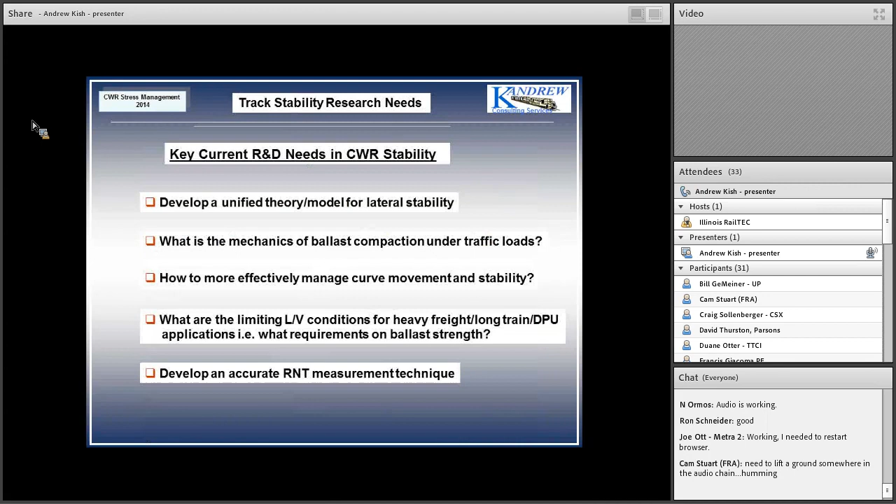What else do we need, obviously, to supplement all this? Much more R&D. And here's where I'd like to get you people involved, because there's a lot of R&D needed in this area. I'm just listing five over here. Some of these we touched upon just a bit before.

First one is to develop a unified theory for lateral stability. We have a theory or model for track shift, we have one for track buckling, but many times the problems come together, they overlap each other. We will need a theory that tells us under what set of L, V, and P loads - longitudinal, vertical, and lateral loads - the track is safe in terms of geometry. The model has to tell us that.

Number 2: what is the mechanics of ballast compaction under traffic loads? We brought up the issue before of needing at least 0.1 million gross tons, or 100,000 tons, to consolidate. And again, our current research and test results indicate that may not be enough. Is that enough? What is? So we need to look at ballast compaction mechanics under traffic loads.

We need to look at the influence of axle loads, the influence of train speeds, the many track types and conditions - wood ties, concrete ties, tangent, curve - efficacy of maintenance, and so on.

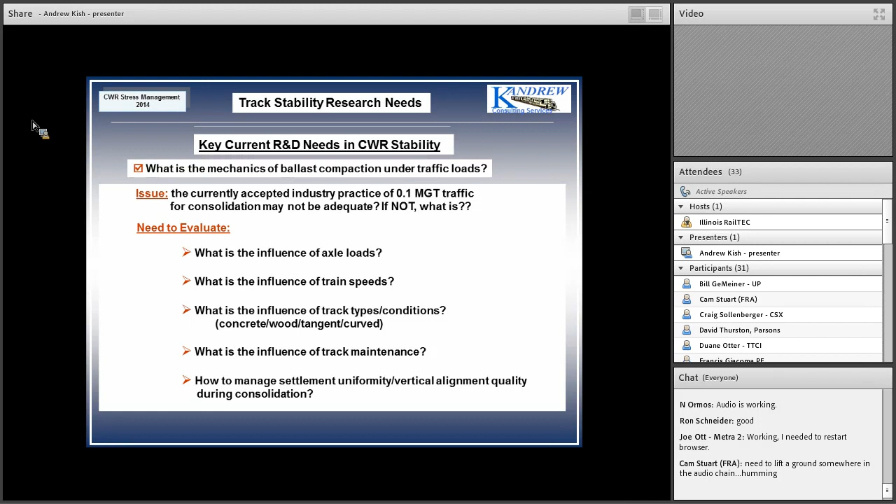Number 3: managing curve movement and stability under both thermal and dynamic loads. This goes back to our curve problem I mentioned earlier. Here's a figure that shows how much change in neutral temperature you get when a curve moves. The vertical axis is the change in neutral temperature. The bottom axis is degree of curvature, and the spoke lines are different amounts of curve movement inward or outward.

As you can see here, for example, if I have a 5-degree curve that moves in 5 inches, that's equal to reducing neutral temperature by about 30 degrees Fahrenheit. That's a big change from curve movement.

What do we need? We need some autonomous measurement system that monitors curve movement, that helps the railroads understand what the movement is in terms of RNT change, and use that in their maintenance practices.

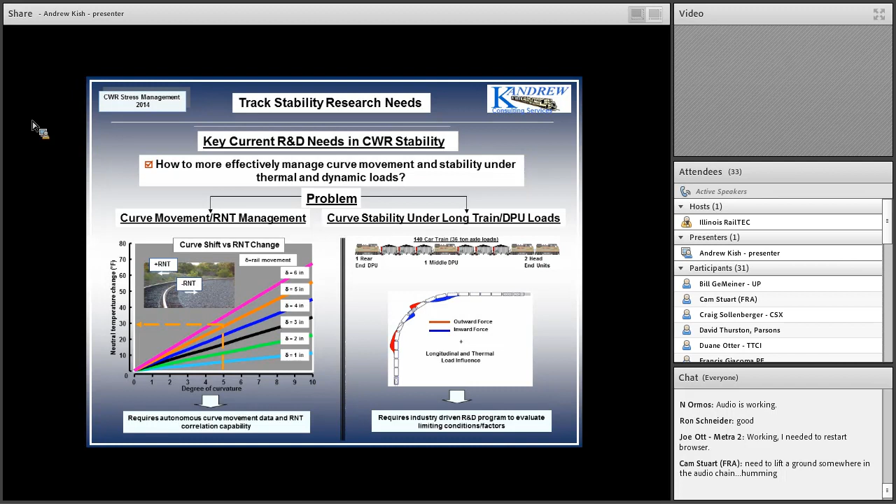In terms of dynamic loads, like I mentioned, the L-over-V scenario - again, long trains, DPU dynamics, lateral loads within the track structure, especially in curves - this requires an industry-mandated or industry-driven R&D program to analyze this problem in terms of L-over-V, ballast strength requirements, and key parameters.

And finally, the Holy Grail: as I mentioned before, RNT. We need to have a method to effectively determine and measure neutral temperature.

Challenges are, for the past 20, 25 years, you need to have a measurement technique that's accurate enough, namely measure neutral temperature between plus or minus 5 degrees Fahrenheit, which means the measurement technique has to be impervious to things like microstructure, residual stresses, and various track types and conditions.

It should provide continuous real-time data, both in time and distance. Because neutral temperature is such a highly variable commodity, we need to make a measurement once a day, once every 2 days, sometimes even once every 5 minutes if need arises. So it's got to be continuous in time as well as distance along the track. And of course, it has to be cost effective for the railways to embrace the technology.

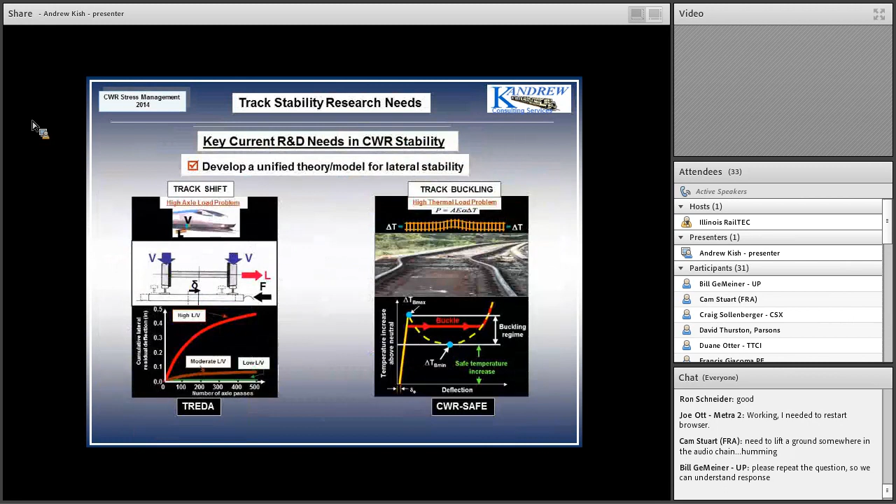It was one of the two graphs that you showed with the knee in it. One was the temperature impact of neutral temperature, and the other was the impact of deflection, and they looked about the same. It was maybe 10 slides back. Well, let's backtrack, I think we do that, right?

Was that it? No, keep going. There. Oh, so on the right, the cumulative deflection. Actually no, sorry, I don't think that's it. Keep going back. There. Go one more. No, keep going, go forward again. Sorry, forward? There. There, the bottom one. Yeah.

So that suggests that as deflection increases, I'm trying to determine which way that goes, which is the cause and which is the effect. If I have a lateral loaded track structure, it's got to go through a loading, unloading cycle into the track lateral strength. The peak strength might be over here, the loaded, unloaded might be over here. But as I load the track up, if I stay within the elastic limit and unload, I get no deflection. The trouble is we don't stay many times in the elastic regime. Loads are such that I go beyond that. If I go beyond that and unload, the unloading path is typically parallel to the loading path, meaning I wind up with a finite residual deflection under each load pass. If I make many load passes, I have to add up these residuals, eventually coming up with a net deflection regime.

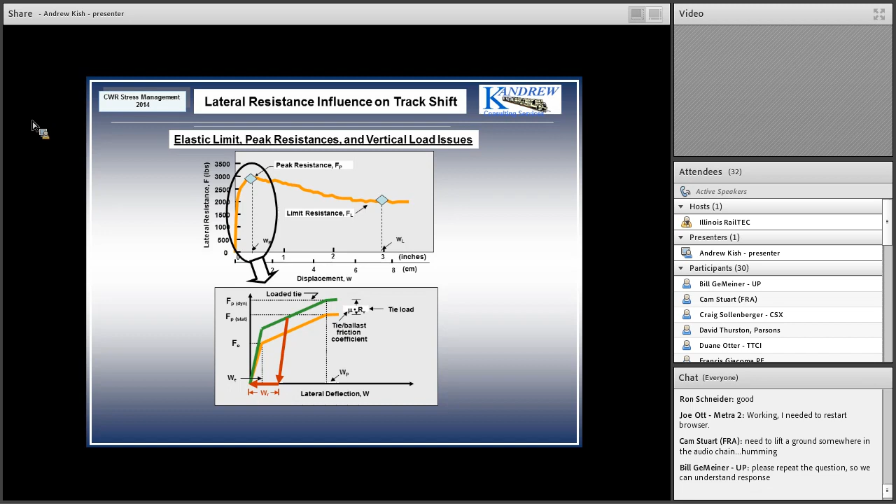And also, it's multiple load passes. So one load does one thing, and the next load does something else, and eventually you create a scenario where, on some load combinations, up to 3 passes, you might be over here, which might be okay, but on more passes you get larger and larger deflections. But that's not tolerable.

The issue with the cumulative deflection is just that you've created a point where the buckling is more likely to occur than anywhere else on that stretch of rail. Correct. But that's why I said before we have to eventually come up with this unified theory, because now this issue would bring the whole thing together. Because right now we analyze track shift as a lateral load problem versus buckling being just a compressive force problem.

That's the graph I was talking about, by the way. Anybody else? Ernie?

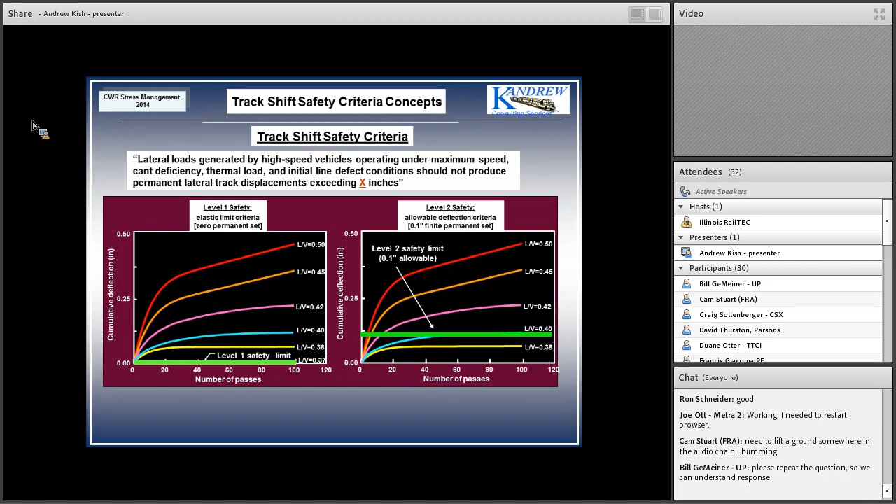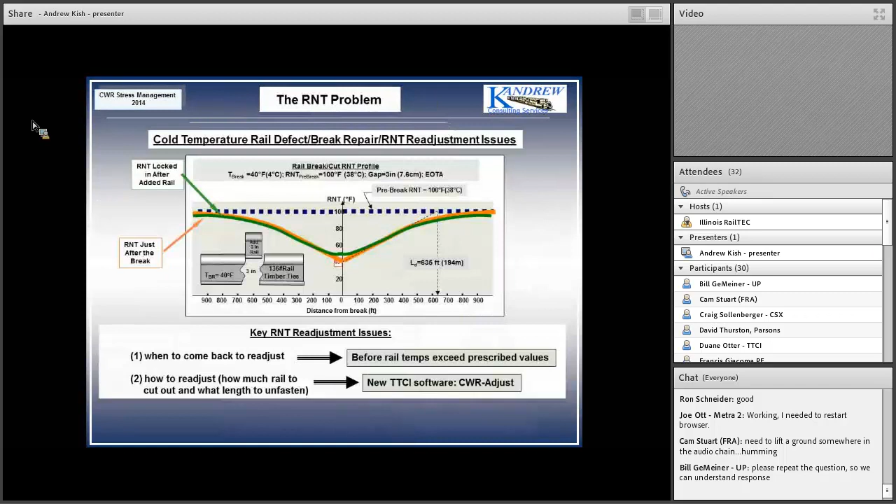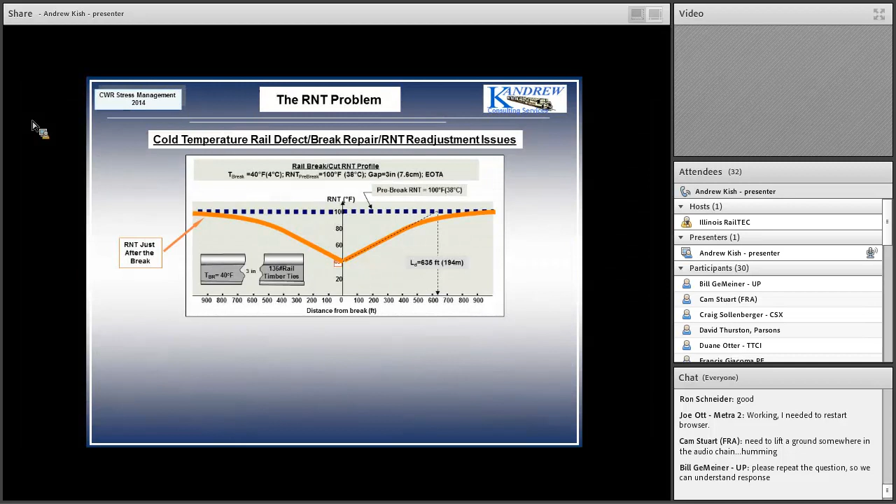If I have every tie anchored, that helps. So the track's longitudinal strength plays a key role in how much of this influence zone you get. Was that your question? And that's the way to manage. For example, if you have a high quality concrete tie track and it breaks, two things happen. The gap sizes are much smaller, therefore more manageable. And then, of course, this influence zone.

When we pitched this to the railroads, they loved the idea, the concept, the theory, but they said, no way we're going to unfasten a length of rail of this magnitude. We don't have the resources. In the past, we've done only 200 feet. So we have to come up with a compromise, a number they're willing to do that is at the same time effective enough to pull this back to some reasonable value. But managing breaks is a tough issue because there are a lot of them out there, over 180,000 locations on the railroad that they have to fix.

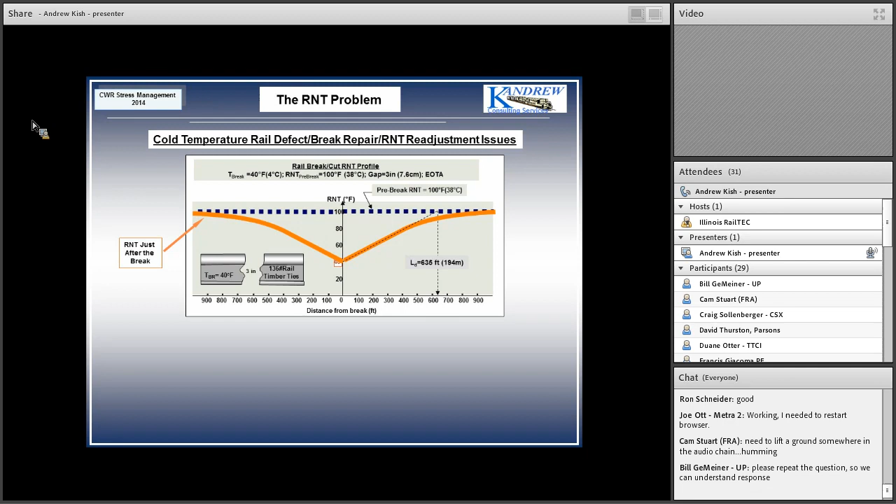I have a couple questions back to the point about the stabilization of the track under traffic. You don't have to go back to the graphs, I just have a question: do we understand whether that's a function of tonnage or wheel passes?

Because the railroads, they don't want to run all these trains for that purpose. It's damaging for them. They need something better.

One of the people who's not here today, but I think you know, is Professor Erol Tutumluer, and some of his work on discrete element modeling of ballast occurs to me could be a modeling technique to address these questions, but obviously would need to validate it under test conditions as well. Any research of that nature that helps define how a train load scenario with multiple passes and tonnage affects the problem is very important.

In triaxial load testing data for ballast materials, granular materials in general, you'll find that permanent deformation accumulation is stress history dependent. If you have heavy loads, you develop a certain amount. If you back off and the next train has a bunch of lighter loads, they don't count as much. So if you drop below those earlier conditioning levels, that's fine.